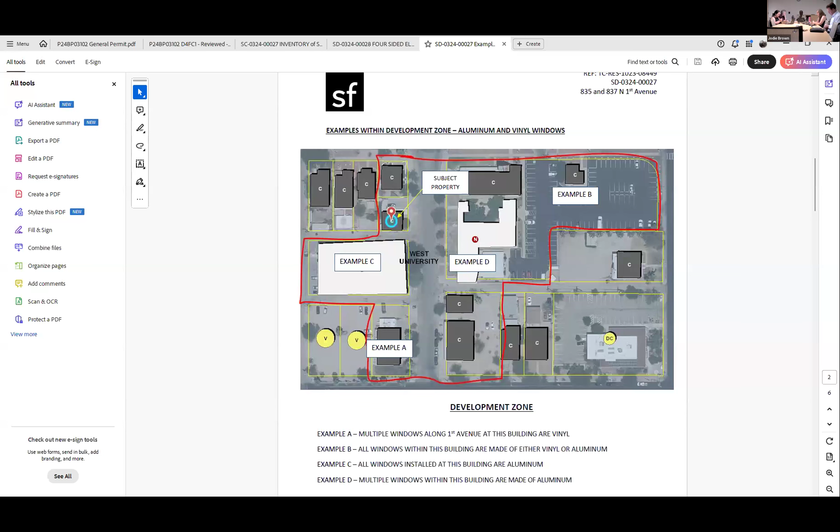Okay. So we'll start in regards to the property. This property was almost fully renovated other than the electrical work. All new vinyl windows were installed. The air conditioners on the north and east were installed, and the interior was renovated. There was a stop of construction required after code enforcement came by, and we created a submission of this property to match exactly what was actually being put into place.

So this is a shot of the subject property as it currently exists. You can see the large tree in the front and the replacement windows. The casement or the awning windows will occur on the north elevation. They do have to be excavated and widened and put in window wells to be able to make sure that we've got proper exit and egress out of the lower level.

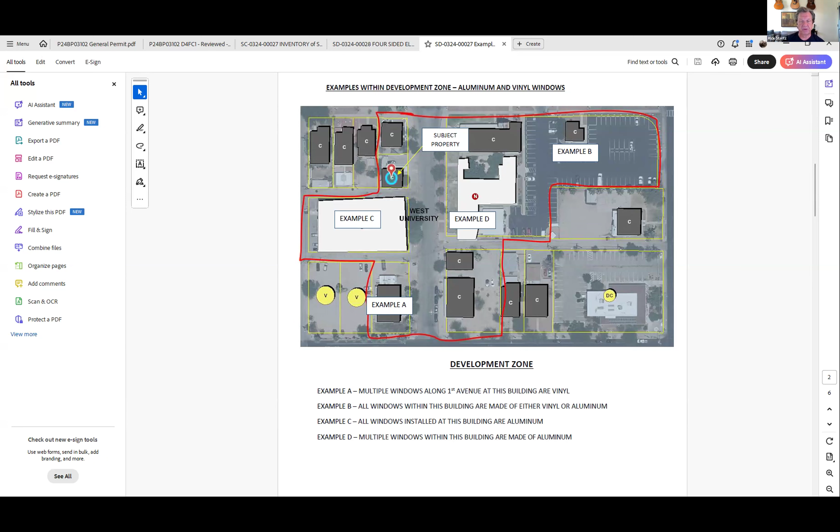And the owner's requested, although he will agree to mitigate if required, he wants to hear whether or not you would be comfortable with leaving the alley windows on this side and the bedroom windows on this side as vinyl, and replacing the east main window, which is the main facing window going into the house, with metal wood clad.

The examples are shown. This is on the fraternity house directly to the south of the property, showing vinyl windows. These were replacements and additions that have been put onto the property, obviously not part of the original structure. This is the building. This is the little island building if you go back to the development zone, this is building C right here, example B, which shows all of the windows on all 4 sides are aluminum or vinyl.

The 3-story apartment building, this is the alley that is directly to the south of the subject property. All of these windows are installed as aluminum. And the church building across the street and the administrative side of the building, those windows are aluminum as well. So that is the example of what the existing conditions are.

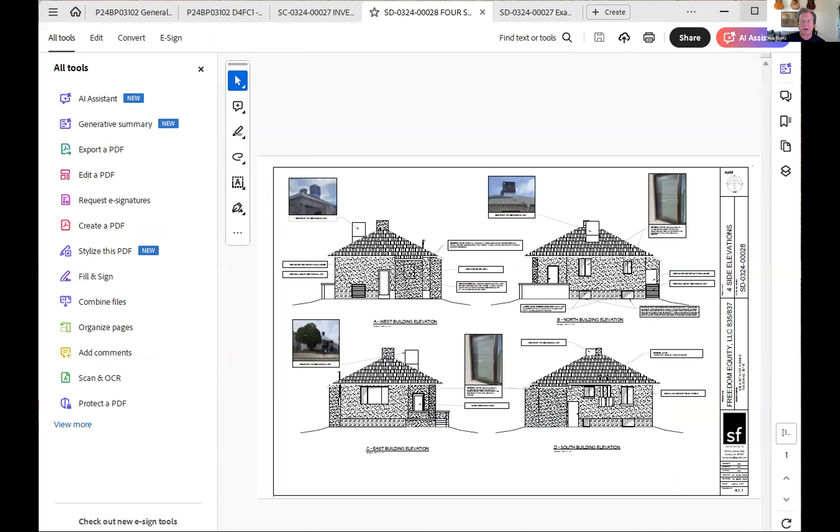The elevations of the property, this showing the west elevation. There is an air conditioner going here. This was recommended for approval by West University. This is the water heater enclosure recommended by West University to be painted to match the house. This is a pop-out addition that was put on subsequently by the previous owner, which included a window which is literally on the property line.

So we recognize that window needs to be closed, and that the west elevation and the south elevation of that pop-out, which is now covered in, I don't know, a combination of plywood and T111, needs to be unskinned and resurfaced, insulated, and properly stuccoed with a stucco material to not match the stucco style of the historic part of the building. Looking at the north elevation, these are the 2 awning style egress windows coming out of the basement or the first level.

And in regards to keeping the windows, he would like to be able to have these stay as in the north elevation and the south elevation. This faces the alley. This faces the parking lot to the north of the property. This is the primary elevation, which is the east, which faces First. And he'd be comfortable with replacing that metal or vinyl window with aluminum clad wood to match the profile of the historic window that was there prior to this renovation.

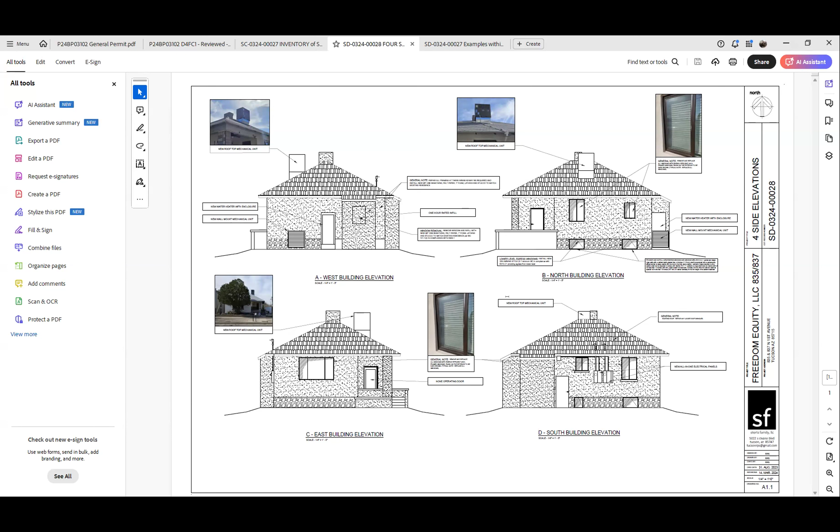Okay. Are we ready for Savannah's questions? Yeah, I mean, I guess it sounds like we're all on the same page that we can't approve it as presented. I guess I'm just curious about the next steps. I mean, we'll need to see revised elevations, and I don't think we've seen a site plan, right? We're talking about context of property line and things like that and additions. I think we'll need a plan. That's right.

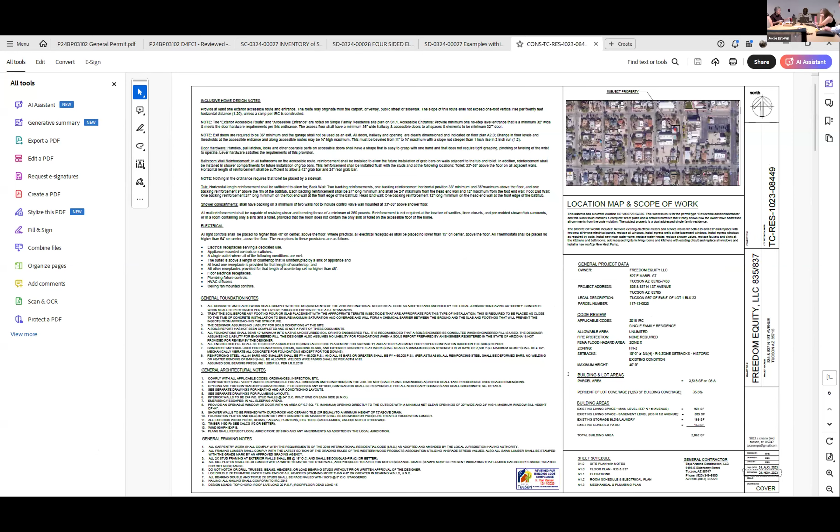So I thought of another question. Go ahead. So when we're looking at the 2022 picture, there's this ramp that was put in that's metal. That elevation now shows that there's stairs there. Were the stairs under the ramp or are you rebuilding the stairs? The stairs are concrete stairs and they were there. Okay.

I didn't see the plans before. Those weren't posted to us, were they? It's just the elevation plans. That's all. Sorry, I meant floor plans. We didn't get a site plan or floor plan. Okay, so we haven't seen this before. So can you explain the additions on here? You said one was near the property line. It is that little pop out right there.

Okay, going on the west side of the property, and this to the south side of the property. Okay, and those are proposed new additions? No, those have kind of been there for years. And what we're talking about doing is, because they're usable interior space, we want to take off the existing material, which is T111 and plywood and decaying material, and restructure as required, and then stucco that in a stucco finish that is complementary but dissimilar from the historic structure. Okay.

And that's as shown on the elevations you gave to us as a dissimilar stucco finish? Yes. But the elevations that we see still show sliders and stuff like that. It does, and in regards to an approval and a process, we'd be willing to stipulate that all the windows, and I just checked with the owner, he said that he would be willing to replace all of the windows, including the awning style windows, and to meet all of the requirements as outlined and approved by the West University neighborhood historic folks, which would mean to put in metal clad wood windows as a replacement as a stipulation to the submission,

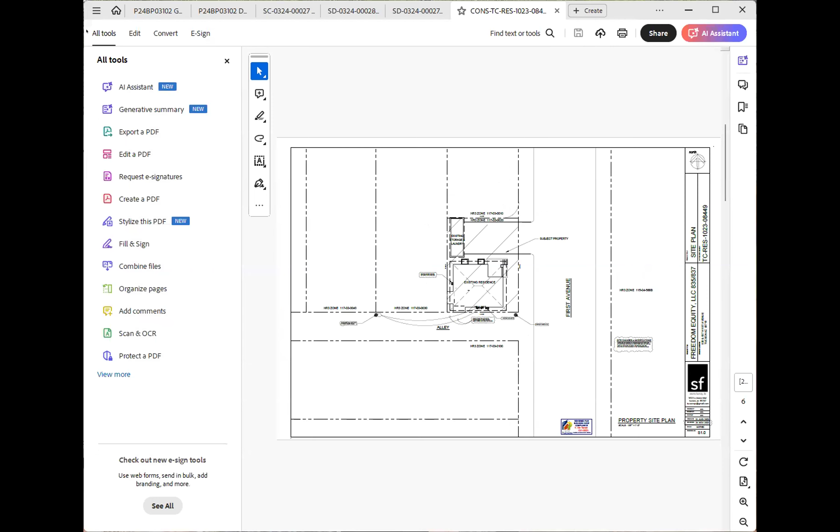So just so I'm clear, we're talking about the large window on the east elevation and whether the center window is operable or not. Right. Okay, I think it's operable, because why would you put a screen on it if it wasn't? Oh, well, there's that. Sorry. So I do have one question while you're forming this motion.

What are your thoughts on single hung versus double hung? I think single hung actually happens a fair amount, even though we call it double hung, because that's what we're used to speaking about. Yeah, I have a motion drafted where I'd call it single or double, so stylistically I don't care. Right, single will be much less bite out of his pocket than double.

Okay, so for Savannah, for the windows, we're thinking all windows should be wood or aluminum clad wood and shall match the original single or double hung configurations. And then do we want to add additional language for that front window? Maybe just that it's in the three-part to match original. And if all three should be operable, we should say that. That's fine with me. Okay. What else?

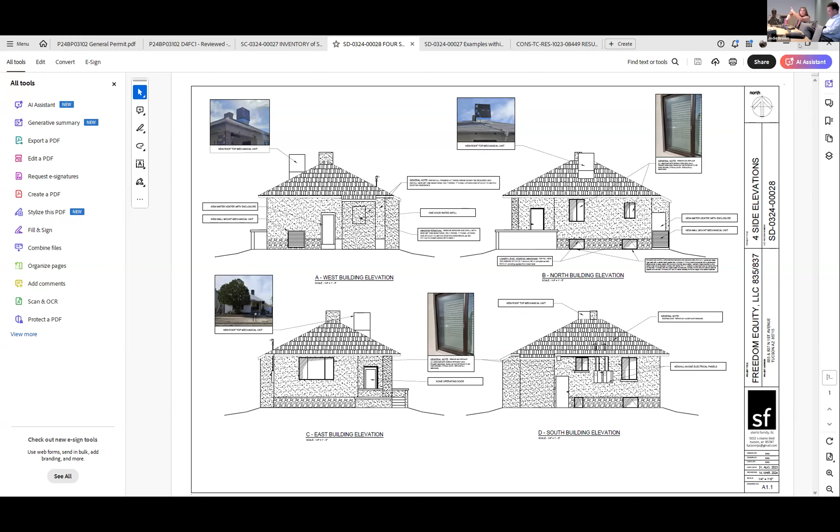The windows that we had, the vinyl windows, don't work, because that's no egress at all. But if you come out in your window well and your awning window is like this, the awning ends up blocking you from getting out of your window well. You guys understand what I'm saying, right?

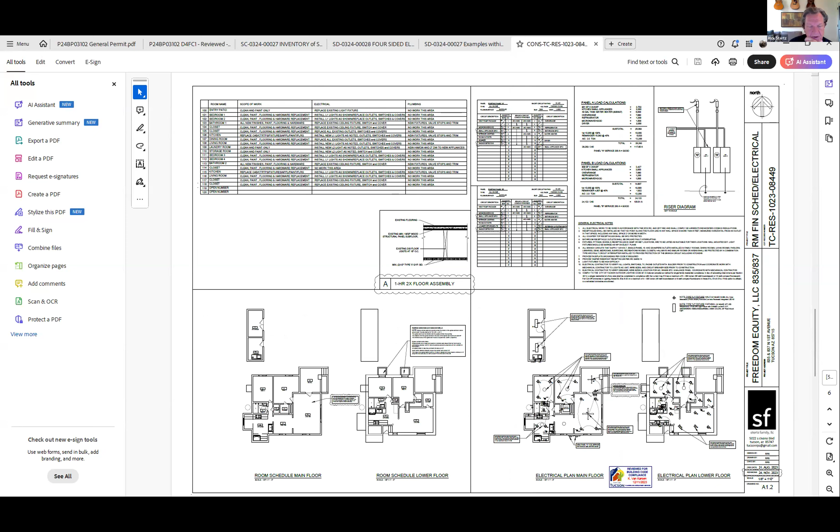A really big well. I do. I think there's a minimum clear height for lower level egress in the IRC as well, but that's not our purview. There is. We've dealt with this issue already, making sure that it met requirements.

Oh, sorry. And the window wells at these awning levels are wide enough and create enough width for the 5.7 minimum square feet of access. And the window wells are large corrugated dugouts, so to speak, to be able to access, and it works.

Okay, you just need those 180-degree hinges, so it can swing fully clear. Yes, we need 180-degree hinges, so it goes all the way up. They can't be the 135s, right? That would be a horrible way to die, that you couldn't get out because of the awning.

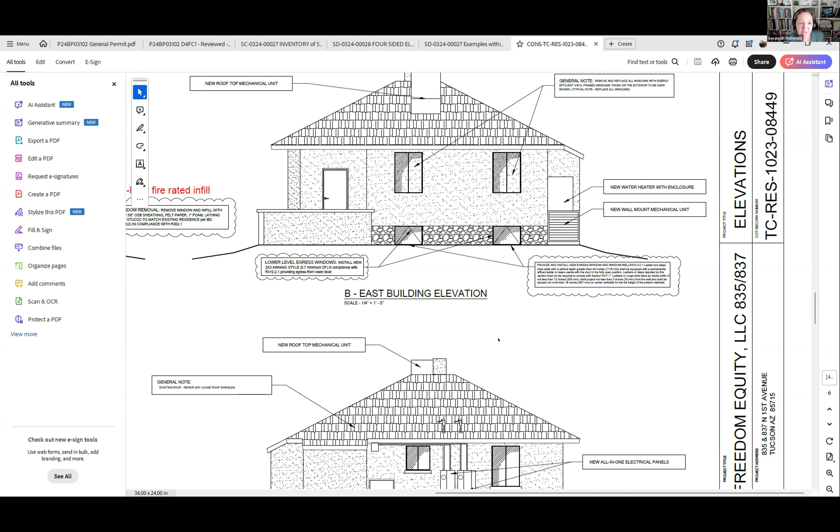Okay, where are we then? Are we still going through the West University recommendations, or are we beyond that now? I think Andrew is drafting a motion, which is excellent, but I just wanted to go back to what Jan stated. It's going to be a long motion full of lots of things, and where's the threshold of, like, just stuccoing where it's not stucco that they didn't plan on dealing with. It would be desirable to have something come in and say, here's the existing case, here's what we're proposing. And then it would be clear, we think you should also stucco here, even if you would rather not, so that we could have a meaningful application to review.

If we don't approve it, is there still a way to formally send our comments to him so that he can address everything? We could continue it; we either approve, deny, or continue. But what would be the point of continuing it? I think for them to really show what they are planning to do, because as we're discussing things, we're asking about things and Rick's saying, well, that wasn't part of the proposal, but we could. So then we have to figure out how much of it is beadboard, T111, blah, blah, blah, and try and cobble together a motion that covers everything. And it just feels like it's inadequate.

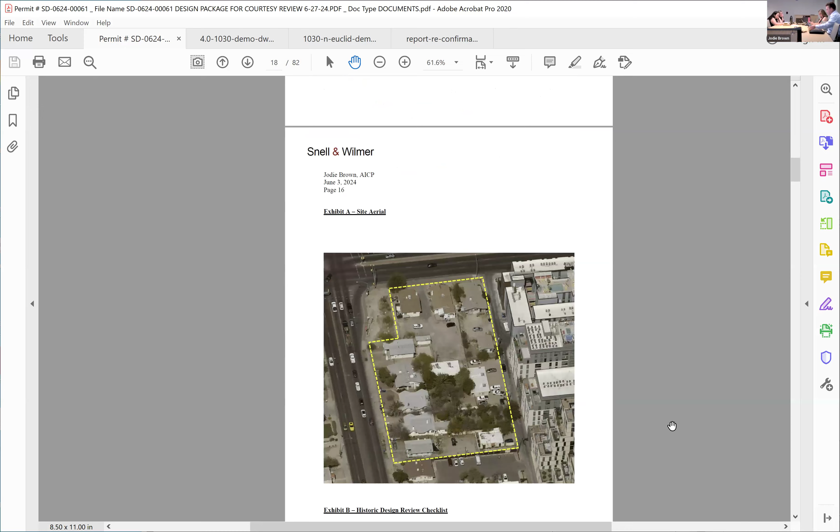And then there's a portion that also addresses the design guides for UOD, which is your guys' thing, but that is in there as well. So it's one collective document. Happy to go back to that with any specific questions. And then, once again, there's a lot of text here. That gets us into the site, and these were the checklists that we were utilizing for that framework. And then some of the surrounding context, which has been an interesting challenge for us, given

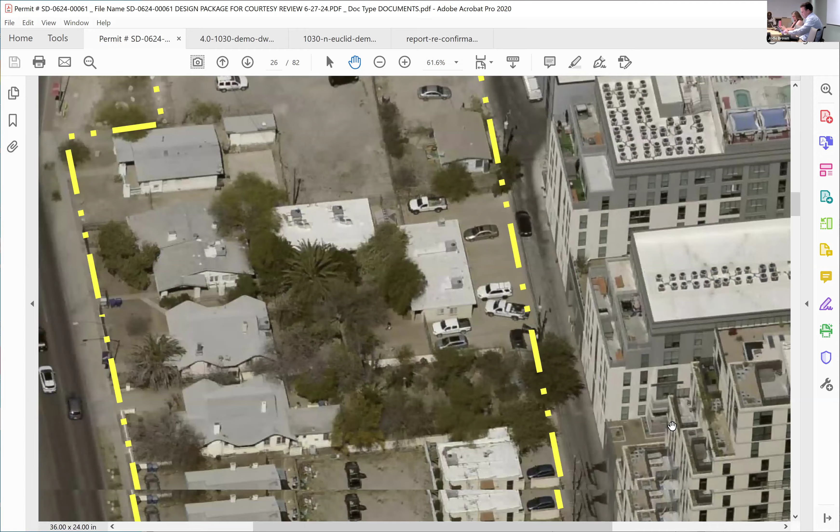trying to put something that meets overlay standards up against West University. So we're working on trying to find ways to balance details, and I'll show you a little bit of what the design team's done in that, and it's been contemplated as we go through. Again, we're all familiar with the sites. So I've got the technical drawings in here, and then I'll move into some renders, and then we can get back to these if there's any questions.

But basically, the building's laid out similar to what we did through the entitlement process. The two retained historic homes are living in this portion of the site here in the southwest quarter, fronting Euclid. A little hard to tell here, but I'll show you in the details a little further down. But the idea was to play off the frontage of those homes. So we have the townhouses.

The detailing on those are designed to be 2 stories. And so those elements there kind of play off of the 2 homes as far as that roof line element, as far as height goes. And then as far as setback and streetscape experience, try to retain something that plays off the porches on those homes.

And then you can see the rest of the building footprint here, so these are the townhome units here along Euclid, and then it steps back as it gets a little bit more of what we call a commercial feel as it goes around the corner. The Speedway is supposed to feel more commercial, so the character changes as you go around there.

And then we have the parking garage, which now actually goes a little bit below grade as well, so we were able to do a little bit more with the layout of the units as we got into the weeds. But again, this design gets you a total of 183 units, which is about 525 beds total, and represents 147 parking spaces. We also have our 30 workforce units as part of that total. Got all the data sheets, which are very exciting.

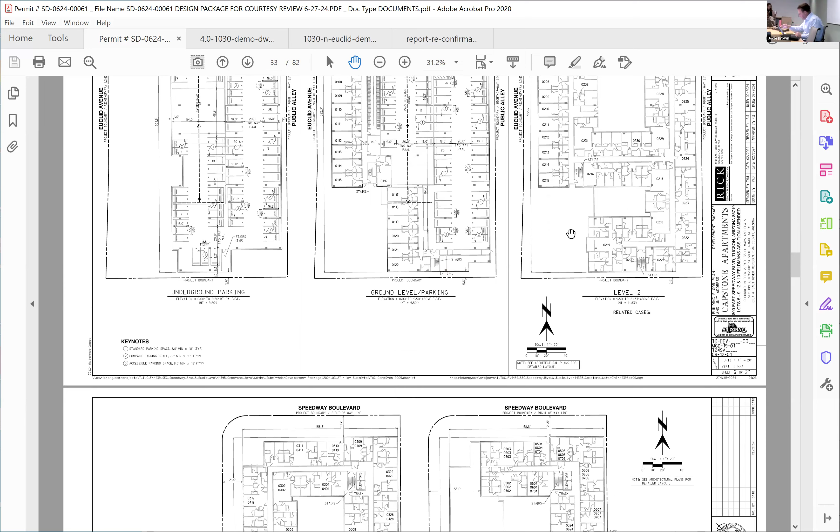When you get to the second floor, the building does pull back at that second floor level. It's a little hard to see in the renders, but picture a void in the building, which is designed to separate those two masses and create some visual interest in that area. As the building moves up to the fourth floor, you can see that's all void there. So that void is intended to open up behind the building.

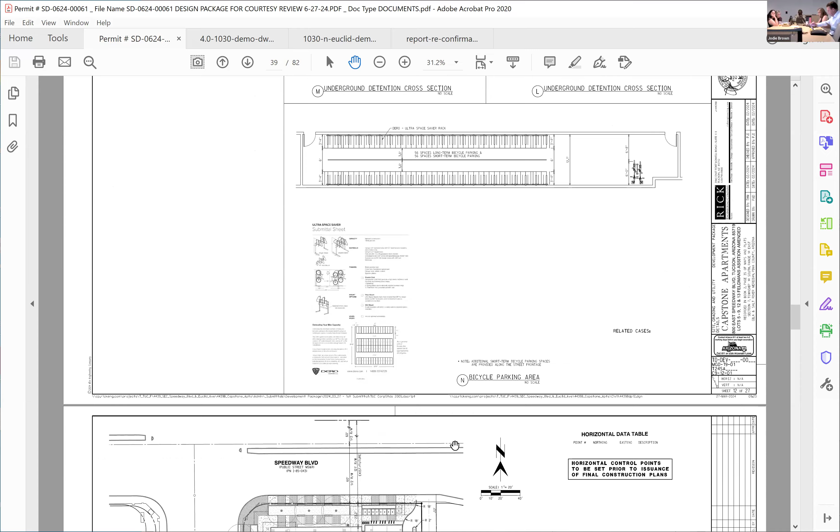So a little bit more detail on the streetscape plan. Again, these are all trees, tree grates, and planters. Let's see, details on parking. If you're interested in parking spaces, I love talking parking spaces. Underground detention, just for everybody's information, we have all underground detention. That was an issue during the entitlement process. So I think we'll manage a lot of our stormwater and are actually accommodating the alleyway as well, to improve some historic drainage challenges.

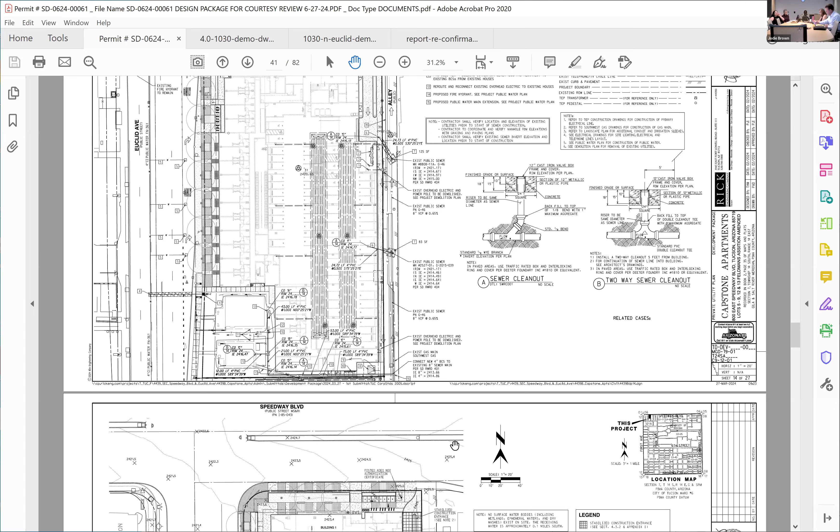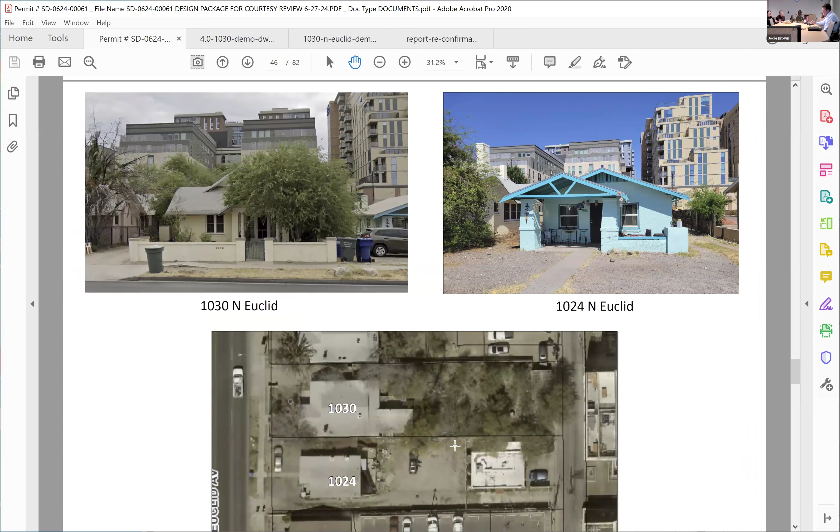And these are photos of the houses, which I think everybody recalls seeing. These are all the various houses out there, and these are our two retainers. So we got 1024 and 1030. And I believe 1030 is the twin to the next one up. So it's interesting moving one of the twins over, so we'll have two in the neighborhood. A bit of discussion about the color. We're not married to colors, so suggestions, happy to talk colors. And again, surrounding context, and got some notes here because we've been updating this as we go along.

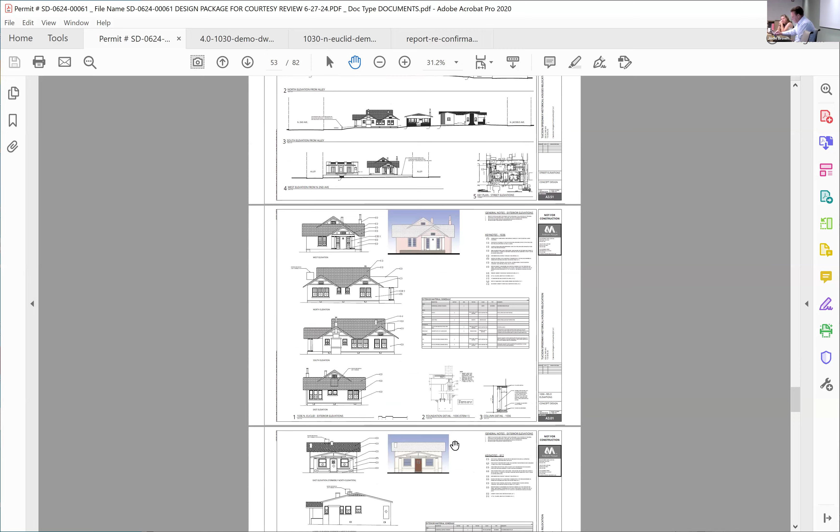But again, some of our challenges trying to pull some of these elements into a modern building is interesting. I think we've got a few different ideas. These are elevations of homes that are on the site currently, which is a checklist requirement, but they are, as you can tell, rapidly leaving the site.

And then we get to the fun stuff, where I've got kind of my flat elevations. Start with those guys. So this is our west elevation, looking from Euclid towards the east. And so the two historic retainer homes are here. I noticed in our render it's less blue, so I guess we're already playing with color. Good job, Jason. This is that void I was mentioning.

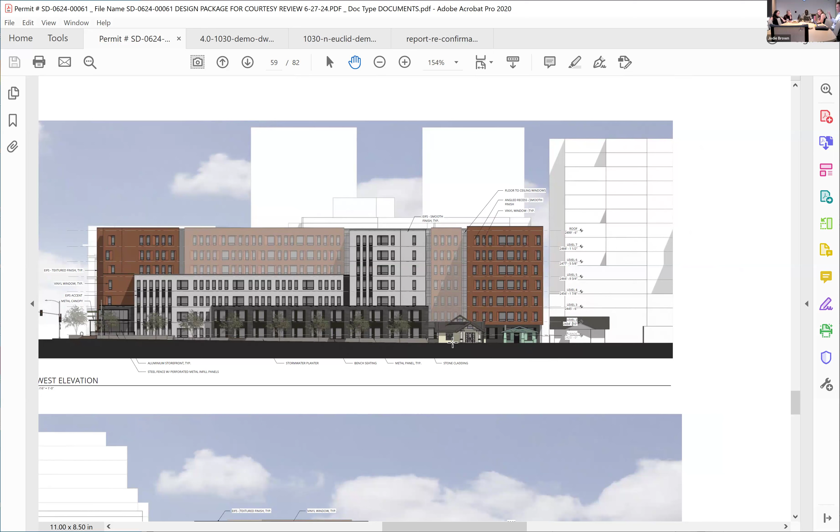So part of that, again, it's kind of hard to see in the renders, but there's a very purposeful void there in the building. And the idea is to kind of break that up, so that element's kind of supposed to read a little different than the rest of the building as the building steps back from Euclid. Those are the townhomes here.

And then you can see it gets a little bit more of a commercial kind of frontage, even though it's residential. The idea is to have that feel a little bit more like you're transitioning on the Speedway. So as you come down, heading to the south on Euclid, it feels a little commercial, gets a little modern townhousey, and then transitions into the historic structures, and then you can see the Udall Center south of us.

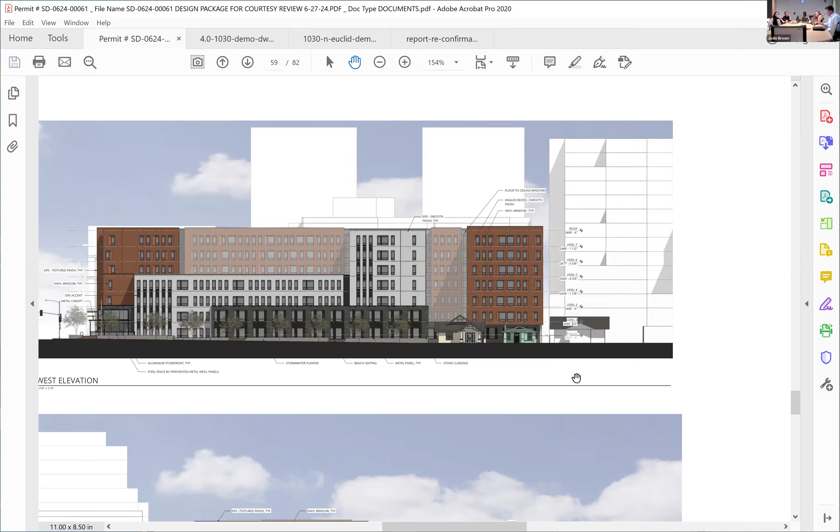This is looking from Speedway at the north elevation. Again, more of an urban appearance to tie into what's going on with the Hub to our east. And then that is the rear elevation. So if you're in the alley, always an exciting view, but again, four-sided architecture to bring it all the way around.

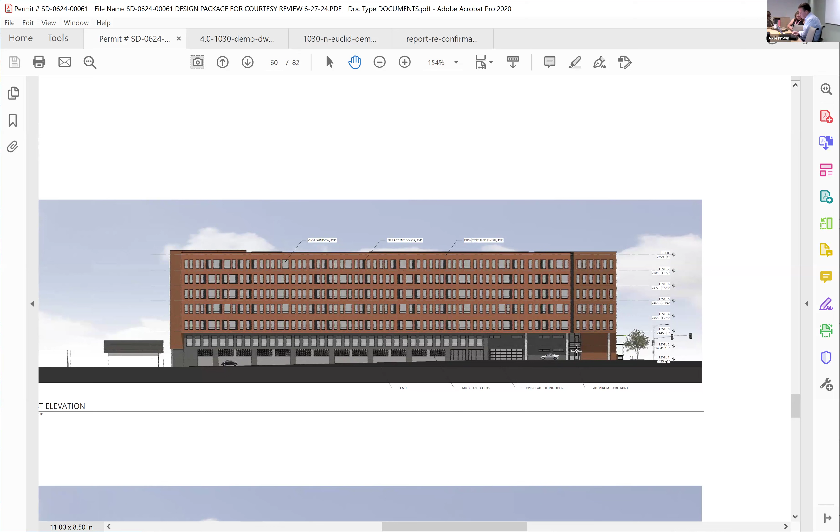What I like about this image is it shows you some of the slope challenges we're dealing with here. The site does have a bit of fall to it, which always makes things a little bit challenging. But here you can see a primary entrance, and we have a drop-off pickup zone up here that's on property to keep folks out of the alleyway. Again, the backside plays off what's going on to the east.

And then this would be the south view. So again, same kind of idea of something that ties into the modern buildings to the east and then transitioning as it heads to the west. And you can see here it illustrates some sections, but again, the idea of those houses was to mirror up with the townhouse. So that's the townhouse detail. These are porches there.

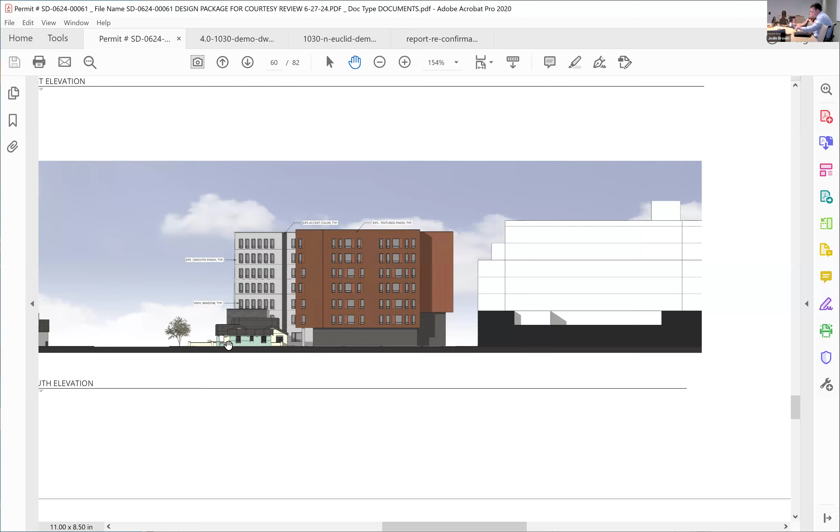So then we've got the development zone map, very exciting here. And then renderings. So all those flat elevations start turning into this, which gives you an idea of the corner of Speedway and Euclid. And again, part of the slope thing is you can see we're doing a finished floor, doing steps and figuring out the ADA access, all sorts of elements we had to address.

But you can see the raised planter treatment on the townhomes. And then as it turns the corner, again, this has sort of a commercial kind of feel to it, even though it's lobby amenity space, not true commercial. And then the building steps back from the corner, which was a design request of the neighborhood. And then again, trying to break those masses up with the use of colors and window fenestrations.

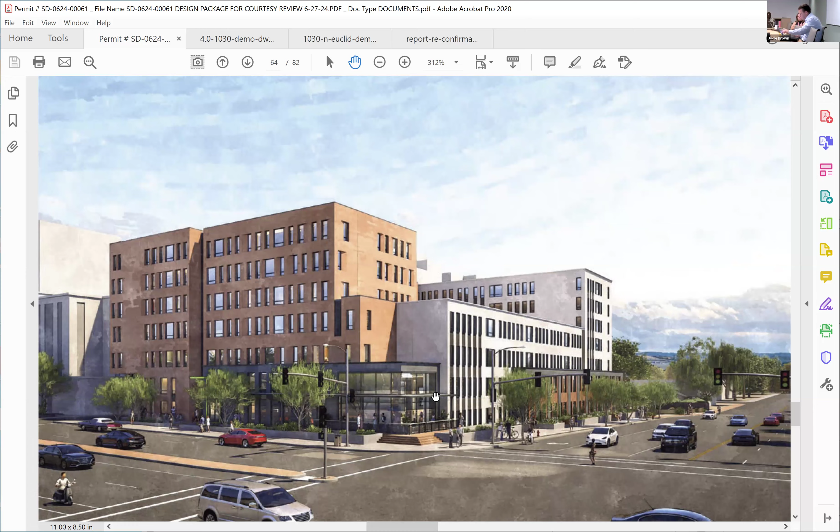And then we get into what those townhouses start to be. So they're again contemporary, but that second story height element plays off the height of the homes across the way. The nice thing about the grade is it gives us an opportunity to go public space with the sidewalk, semi-private space with a stoop step-up element where we can do some planters and privatize, and then up into the units themselves.

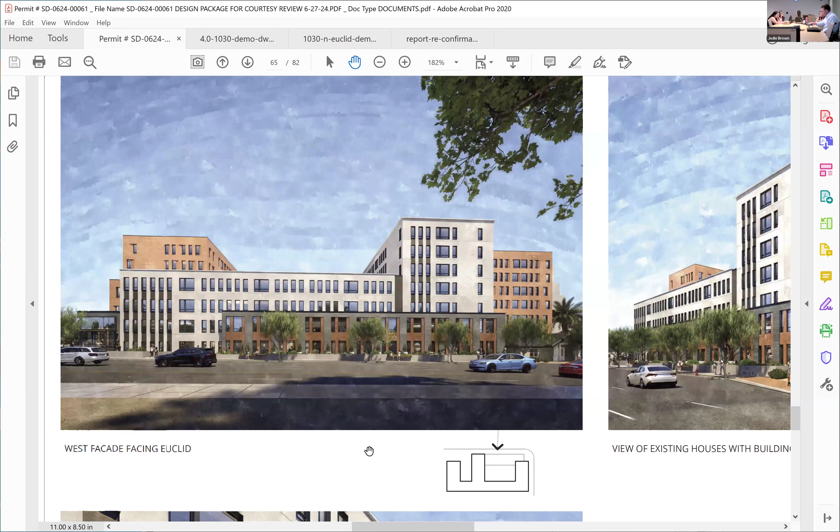And this is actually the main entry on the Speedway. I'm sorry, so this is the Euclid frontage again. There we go. So this is a little closer into what that townhouse elevation starts to do. Again, you can see the planters, and then our little house over there, and then the corner here. I think we were all kind of joking with West University, but our renderer got the scale wrong on the umbrellas, so try to ignore that.

But the idea was again to show the intent is to really hardscape and landscape around these structures in a way that makes them semi-porous and open gathering spaces that feel neighborhoodish.

And then again, transition to those townhomes. Some of the discussion we had and we're looking at is kind of the rear end of this building here, and this is where that step back is in the building. Again, it's kind of hard to see in the render because of the angle. But one of the comments related to is there something we can do with this portion of that structure to frame those a little differently. So Jason's looking at that, see if there's some options, or again open to suggestions. And then this gives you an idea of that as you go up towards those townhomes, planters and the transition space.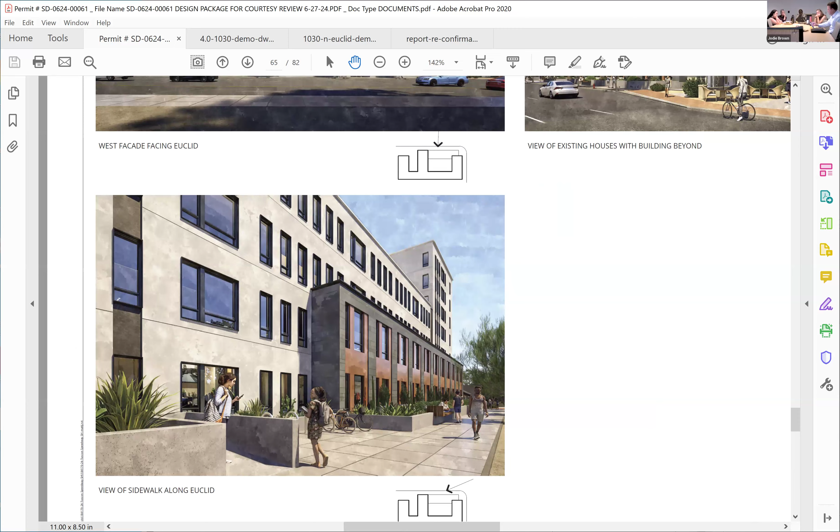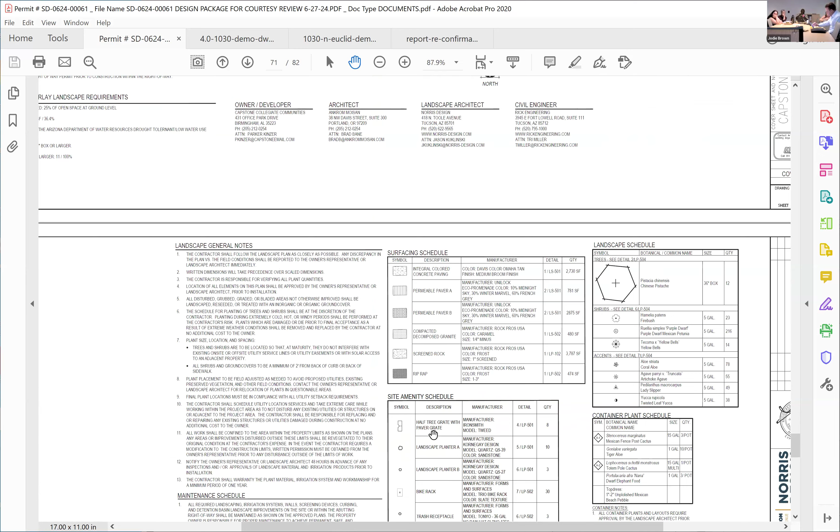So those are where the renders have gone. And then materiality, we're waiting on our materials board, but we can talk about that. Got a sheet study we're working on. And then I have the technical landscape plans if anybody wants me to speak to those a little bit. The version that we've got here doesn't have the final for the hardscape around the homes yet, but we're working on that. And that's pretty much it for now. So I'm gonna go back over to my monitors, and then I'll be happy to take any questions or suggestions, et cetera. Okay, who would like to start with some comments and questions?

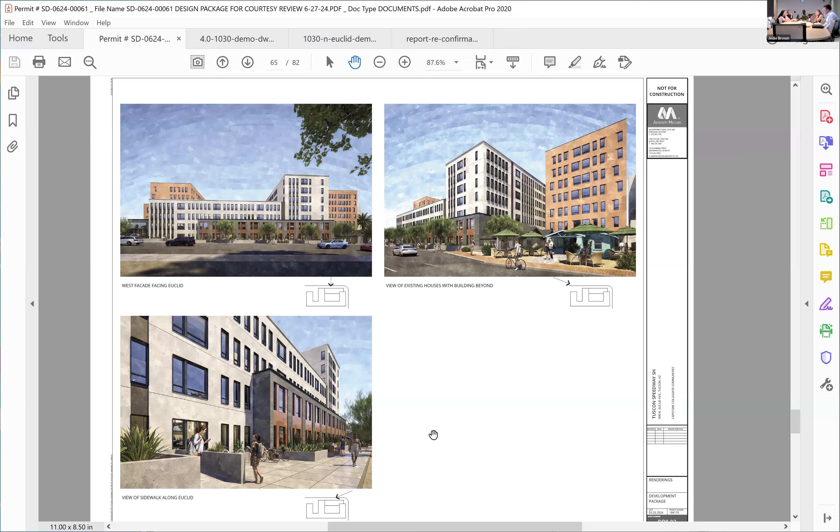Thank you for the presentation. I just have a few. I was trying to remember back when we first reviewed this. Seems like a very long time ago. I think was it last summer? I was trying to remember, there was a massing diagram. And is this a PAD? No, Stan, it's through the Main Gate overlay, so not a PAD. Main Gate, okay. Yeah, we amended the Main Gate, and the massing you see here reflects the massing diagrams that we had worked out with everybody as far as creating some transitional step backs to the structure.

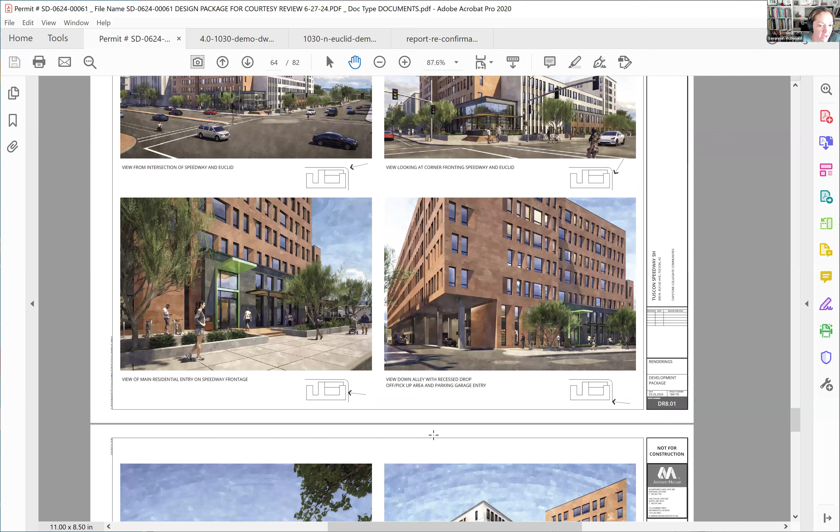Okay, I appreciate that, and I remember going through that process, but I didn't see that in this presentation. So just proving, yeah, we did this process, we followed it, and here is where we ended up. That's just what I was trying to confirm or look for. Oh, and then my other question is, of course, the one blank sheet you had was about material, and you're still thinking through all that. There was a rendering, not this sheet, but another one. It looked like the windows were like 4 to 6 inches back, maybe. It looks very masonry-like. Is that kind of the detailing intent? Even if it's not masonry, what are you guys thinking?

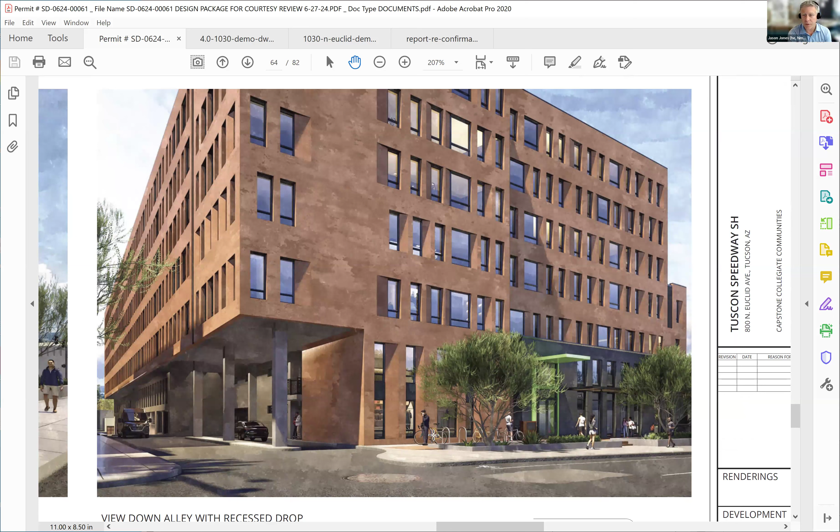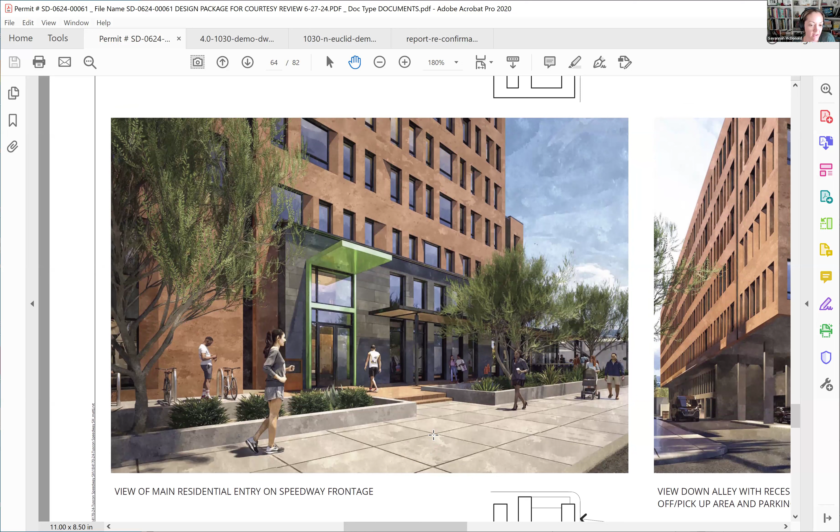Jason, do you mind walking everybody through what we're trying to accomplish here with, obviously not going full brick? Sure. Yeah, not a problem. Great questions. The renderings' intents are to be a little more illustrative as we work through the development of the materials. The large red area you see is stucco. It's an EIFS system. The gray is a cementitious panel and then we'll have some metal panel infills and stucco infills as well. Okay, and the windows? Aluminum? They are currently fiberglass in the estimate. Oh, okay. I'm just appreciating the deep reveal of the window. It has a very masonry kind of feel and look, which I think is kind of exciting architecturally. It seems in line with the other precedent set on Speedway. I definitely appreciate the corner approach too.

You said that was commercial or retail? It's supposed to read commercial. During the entitlement process, the consensus we heard from the community was they prefer it looks commercial, but actually is not commercial. So we do not have any tenants in there. It'll be some of the amenity elements. Like a leasing center? Leasing center, gym, could be study space, that co-office kind of space that students like to use. So programming is still in process, but it'll be active, but not like a Starbucks or anything like that. Oh, okay, and then those two levels on Speedway, that's just more of the same, residential units? Correct. Okay.

Yeah. Oh, okay. No, that was all. That's all I have at the moment. Thank you guys. Okay, thank you, Savannah. Who's next?

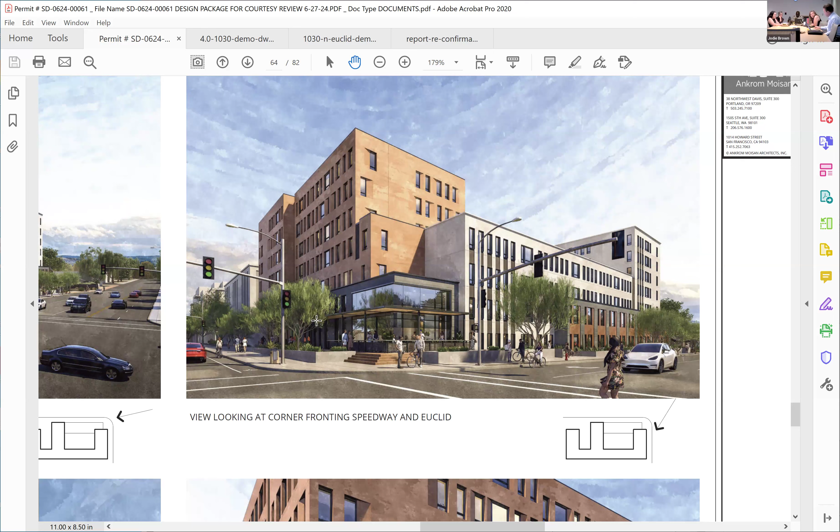I have a couple comments. I don't know if it's just the angle, because the angle we're looking at for the two remaining houses, it looks so tall behind them that it very much feels like the Up house, like it's surrounded. I do appreciate the lighter colors than what already exists in that area, because it looks very industrial with all of the hubs that are there. So I like this return to the more natural colors or the lighter grays rather than these really dark grays that are taking over that corner right now.

I think those are the main ones. I kind of like the funky home color. That's the color it is right now, that blue. That blue, yeah, for sure. I know that's technically not us, but I kind of like that it's that color. We were very open on the color, so yeah.

I have a question. When I look at the white portion of the buildings, your windows all seem to be quite uniform. When I look at your tan portion, it looks like the windows are recessed and there's one side that slopes down. Can you speak to why those are not uniform, why they have that zigzaggy look? I've just heard this from hearsay, because I wasn't here, but one of those other dorm buildings back there has windows that are offset. Apparently that's not how the design was originally conveyed, and when it was built, the community had a conniption. That's what I heard through the grapevine. So I'm just curious why these are all staggered like that.

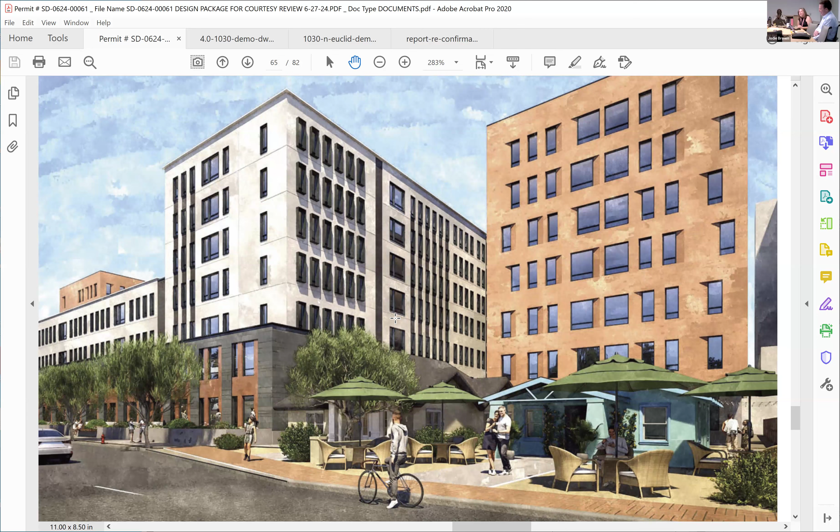Huh? I mean, no, really think about it, it's concrete on both sides. Hot. What the heck did you guys think I said? I said hot. We were all going different places, all right, wow, and you're in the same room with me too.

No, it just seems like, are you doing anything to cool that, or the area behind the houses? Cause it's just gonna be like a heat sink. Do those houses stay as residential? Currently they are, yes. They'll be residential or amenity, but currently they're being deemed as residential. They'll be part of this project. So we're working on the landscape plan that'll be in here.

How wide's that sidewalk area between? So Jason, what kind of width is that? Hold on. Let's get to the drawings. Currently, in the landscape plan, we do have an amenity area on the smaller house, the little blue house. There's a patio back there with cafe lights, so it'll be treated as an amenity. It's 7 feet from the property line. Let me get the right scale here.

Did you say the south one there is a cafe? No, cafe lights will be up above, so it's a place for people to hang out. Come on. You're hanging out outside my bedroom.

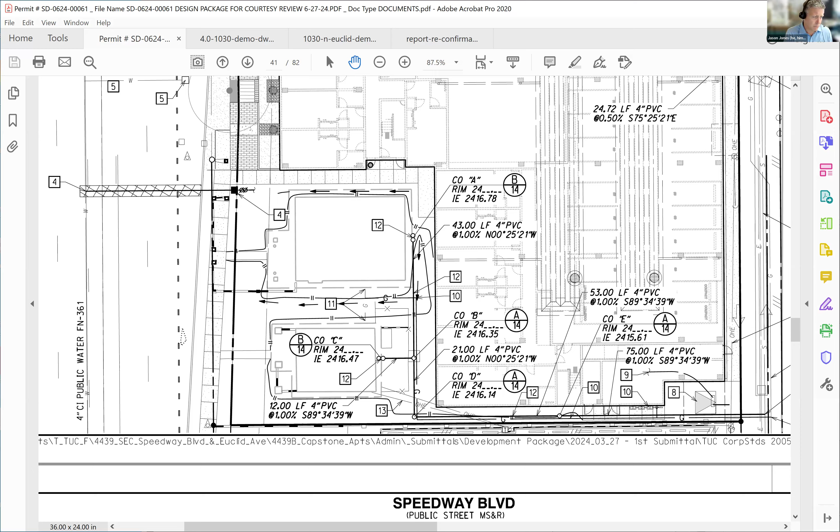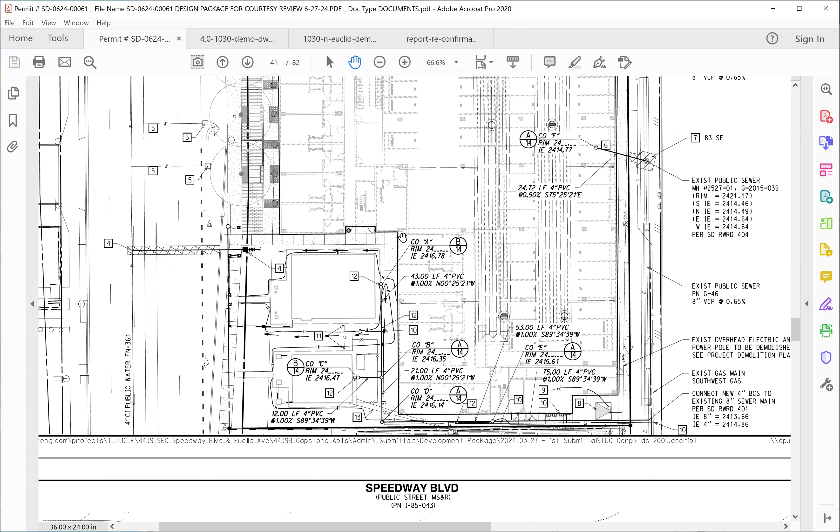While we're on this sheet, I had a question: is the underground parking, it looks like it's going under these two bungalows, is that correct? That is incorrect. Okay, didn't know. Yeah, the dark line that is kind of right by the 10 and 12, that's where the parking starts. Got you, okay, I think there was like a basement plan that it looked like it went under, but yeah, I misread. Gotcha.

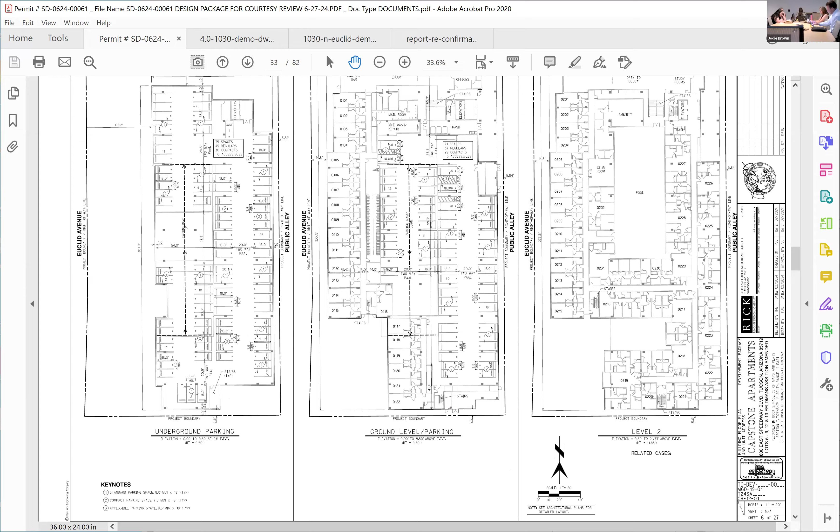Yeah, all these. Oh, I see, yeah, right there. That little notch has been removed to stack all the way up due to the same reason you're probably bringing it up. Okay, all right. We're done moving houses. Excuse me, thank you.

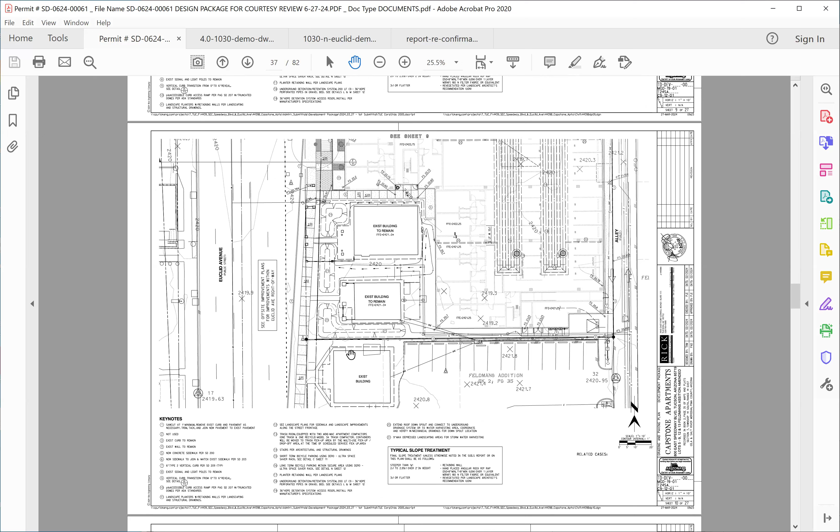I do have some architectural or landscape comments unless anyone else had anything. Go ahead. So in general, I like it. I think the architecture is pretty solid. I like the windows that Savannah mentioned too, the kind of faceted, recessed windows. I can see they do kind of read like canyon-like or like rock sculptural, so I see your inspiration there, for sure.

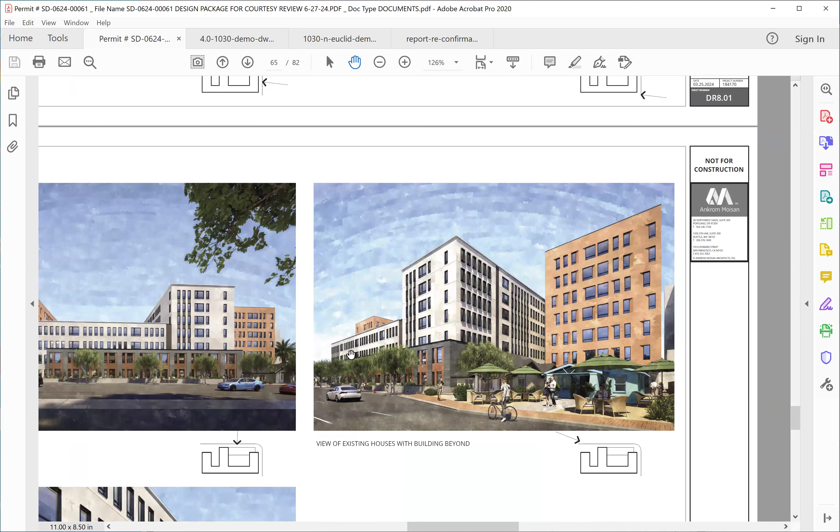I think the scale is, you know, it is what it is, but that rendering that shows the bungalows and then the big towering building behind it, it does feel like you're kind of in a canyon or something there. But I think there's not much we can do in terms of scale.

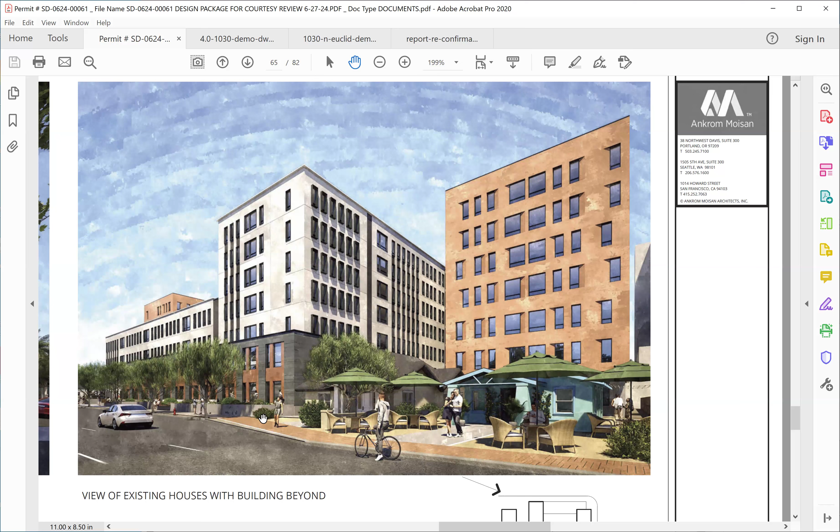One thing I did notice on this elevation, all along Euclid, I think you guys have a really nice landscape buffer and transition setup, and then that kind of goes away here. I'm wondering if maybe you would explore some sort of buffer there so that it doesn't feel like the front yard of these homes just steps out into traffic, and maybe create a little more hospitable place where you might actually put seating and chairs. But that was my immediate reaction. It feels like it just kind of spills right out into the street.

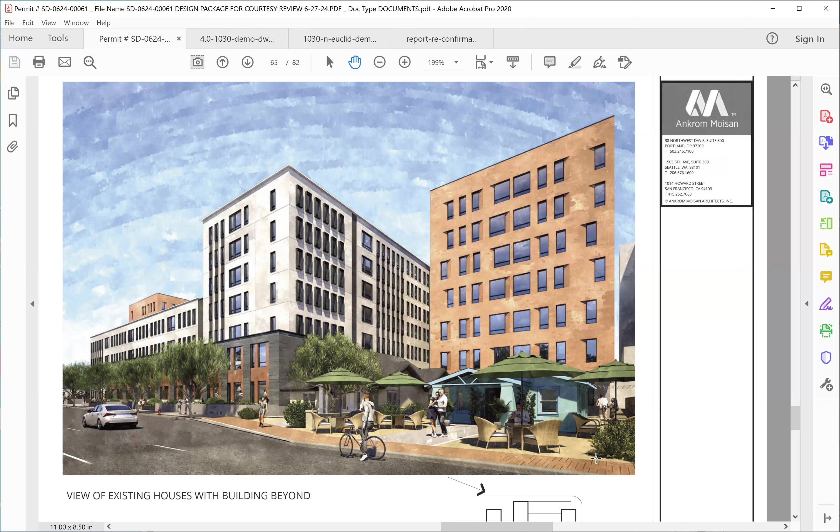The other comment I had, we talked about masonry, but right now you guys are just proposing EIFS and then the cement cladding. There may be an opportunity to introduce some masonry, maybe low, not like a traditional wainscot, but something that would help break that massing down just a little bit at the ground level, like the bungalows and how they're built up on these masonry stem walls.

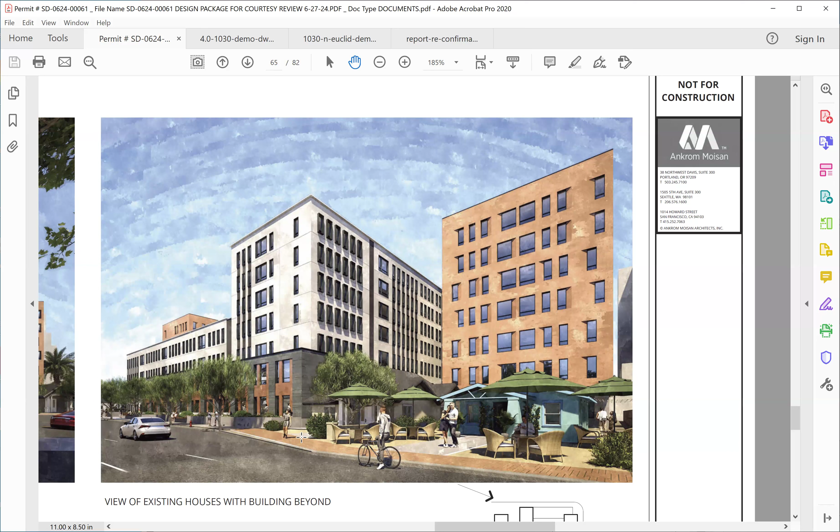Yeah. Our intent was to have the planters that you see right there. Those are masonry. That's a nod to the masonry treatments that we see in the neighborhood on the base. Yeah, I like that. I think if you could continue some form of that treatment in front of the bungalows, that would help a lot. Okay. But other than that, I really like it. I think it's a nice looking building, certainly a lot more intentional than many of its neighbors. So nice job. Great. Thank you.

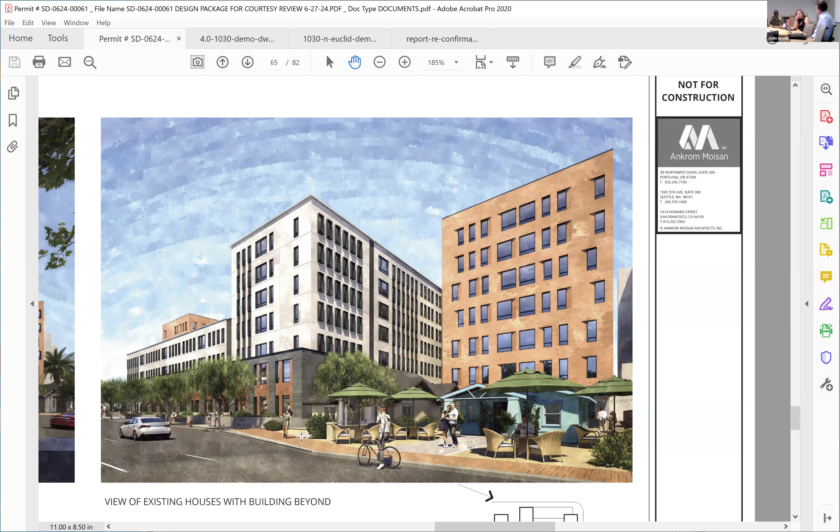No, you didn't see it when it first came through. It did look like its neighbors, so I appreciate getting to see it like this now. Noel, speaking about the landscaping in the front, I seem to recall that you had to actually increase the size of the turn lane there, right? So you lost some land, right?

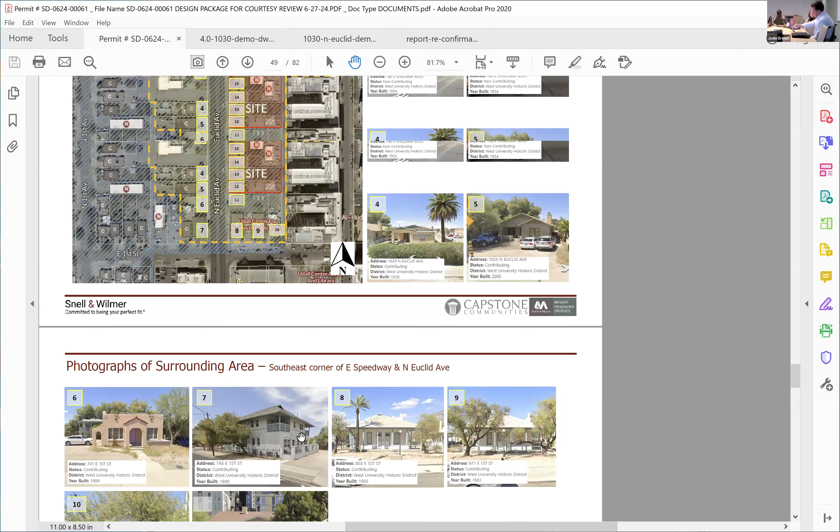Yeah, that's a good point, Jodie. So we actually have, actually I think it's just the same. Which, as a driver on Euclid, I appreciate that you have to increase the turn lane, but yeah, so you do lose some land. Yeah, so part of the challenge with this site was everyone knows the current, if I can see right there, the stubby version of a turn lane, which meets absolutely no modern code.

That gets fixed by this project, and what you end up with is a taper. This is kind of where it is today, and then this taper. So to bring this taper down, the taper has to offset to narrow down, because once you hit the Udall property, we need to bring it back in at that point. So this area here, this curb line work all gets done.

And to the comment, I think a way to help with the front of these a bit would be looking at detaching that sidewalk and maybe formalizing a little bit more with the new building. I think the intent was how much of this can we leave as is. But after looking at that, I do understand that comment. So as we get into the landscape hardscape plan in front of those houses, a detached condition I think would be consistent with what we see in the neighborhood. So it wouldn't be a massive shift.

There is also a historic light pole that they will be reinstalling, even though it doesn't show up on their renderings, it's there. It does exist. It's just being moved. Yeah, we'll move it in. And Chuck and Tree at Rick Engineering have that on their list, very specific items on the civil plan. We'll make sure that's accommodated.

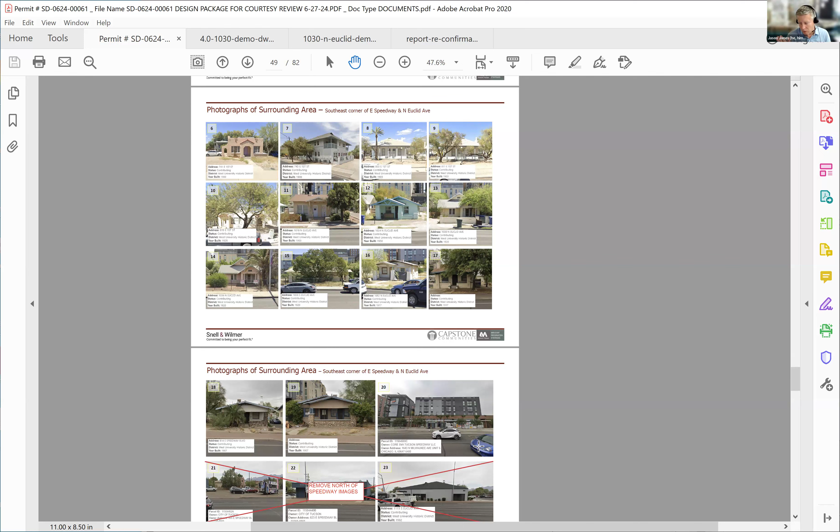Obviously we have a smooth trowel EIFS system considered on it right now, but actually on the interior facets that everybody's been looking at, we're changing the stucco appearance. So we're really trying to play on the different types of stucco in one field plane, but relating back to the smooth trowel stucco throughout the neighborhood. That's kind of our approach to this, not to be too different.

When you were talking about the masonry work for the planters, in here they're smooth. Are you going to have some sort of design? I'm thinking of the chimney that got removed on the house that got moved to Joel's property. And also there's a lot of those walls that exist on campus that look like they have the lava rock from the mines. Yeah, we can definitely take that into consideration.

Actually, Jason, I'll send you an image of the one where the streetcar goes down the same street as Second, and it's got that low wall. And I think scale-wise, I'd love to look at the number on it, maybe in the ballpark there. Maybe there's a way to just play off those a little bit. Maybe just introduce that for the townhomes, and then that could be a transitional material.

On the white portion of the building, it looks like that parapet cap is proud of the building quite a bit. And I do like the shadow line that casts. Is that intentional, or is that an artifact of the rendering? No, it's intentional in this rendering. Okay. I do like that, and I think very abstractly that relates a bit to the deep overhangs of a lot of the craftsman style homes. I hope that's not a value engineering target at some point, but I like the shadow that it creates, and I think it helps with the scale. It caps that building nicely.

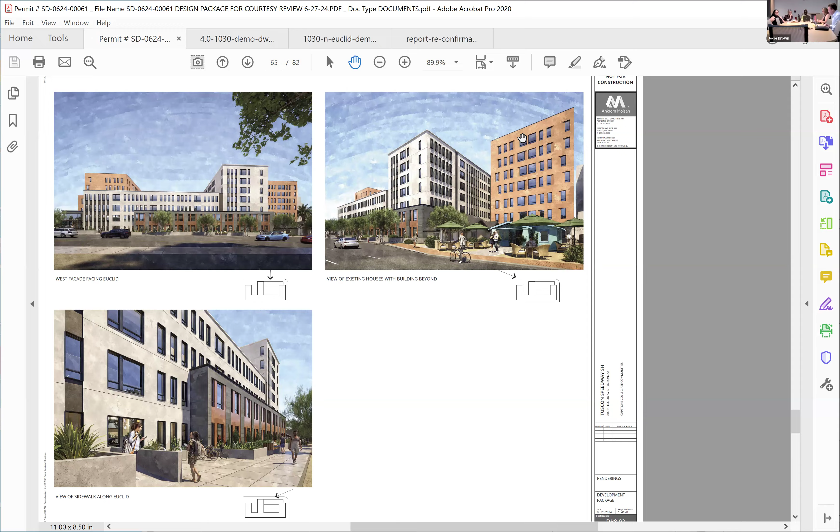It's in our name. Okay. Anything else from any of the group? Thanks very much. Well, appreciate everybody's comments. It was very, very helpful. Been taking diligent notes. Frankly, that's why Sarah's on. So Sarah, you got everything, I hope, because Jason's got a little bit of work to do. Hey, yeah, I got everything. Excellent.

Now, what are your next steps? Are you going to continue to develop this and come back for another courtesy, or will the next step be your formal submittal? Yeah, we'd like to actually go ahead and move right into our formal submittal. I think we got clear direction from West University and y'all today that we can bring back something we can work with. Hopefully get that support recommendation.

And then are you scheduled to do also a courtesy review with one of the Ds? DRB, DRC? You know, that's a good question. I've gotten two different discussions on it, so I think we need to have the sidebar. Okay. So ideally, not to tell you enough to do, but hopefully be back here next month or the month after, depending on how fast my team can draw. So we'd like to be back quickly.

Well, one drawback to student housing projects, you definitely have a hard opening day. You miss August, it's another year. So unlike a normal apartment where if you're a month off, you're a month off, students for some reason all rent in August. I don't know why.

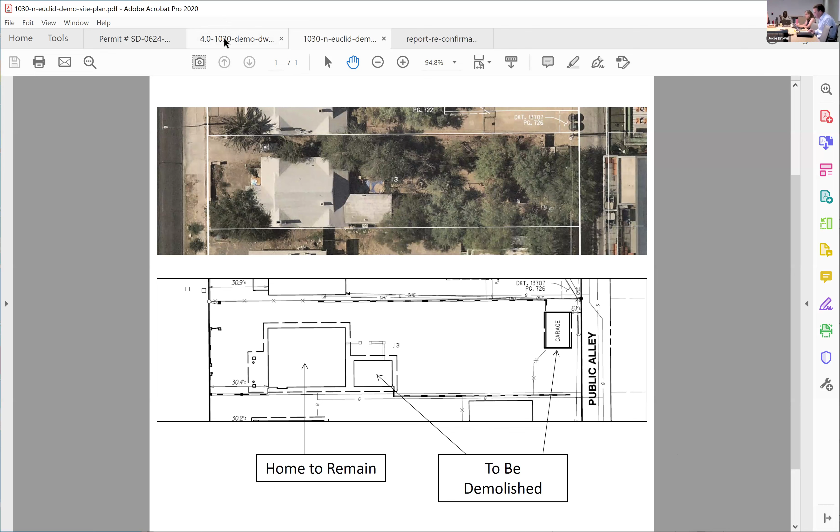Great. Yeah, this would be a very similar slide to a conversation a few minutes ago. And this is the 1030 house. So that rear portion is a detached outbuilding. It's integrated into the roof, but it's actually a freestanding little structure. I'll get to the fun stuff. So we had Roger, who's on with us, do his report, which you should have. I won't bore everybody with it. The conclusion was it's not contributing. Although it's a well-written report, Roger, so not to skip over it, if there's any questions, I'm happy to revisit it. But basically, it's 262 square feet in the back. It's detached off the back, and we'll show the photos here.

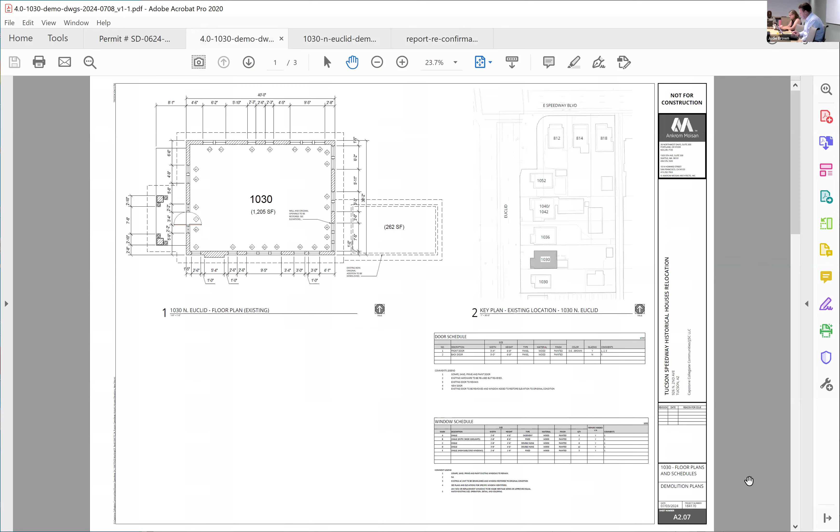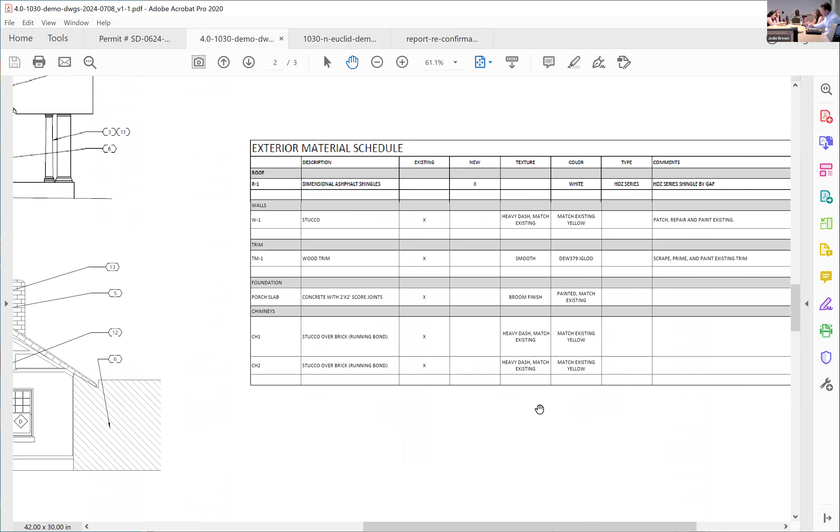So what we would like to do is remove that since it's in the way of some other stuff we're doing. And we have a rehabilitation plan, which on this one is actually fairly simple because they didn't connect it to the house. I don't have to worry about the back. So really the issue was just dealing with the detail in here. We obviously had the design team come up with some instructions to the contractor, but essentially we're going to take the thing off and then repair any damage there is to that existing roof line.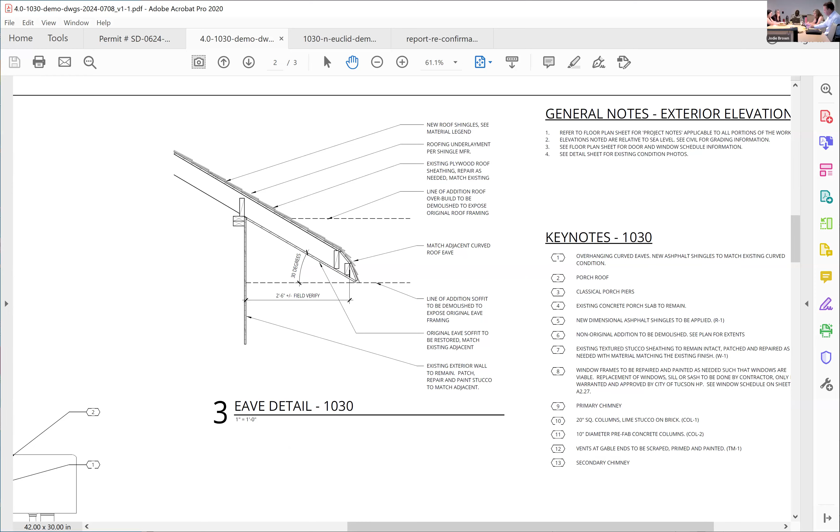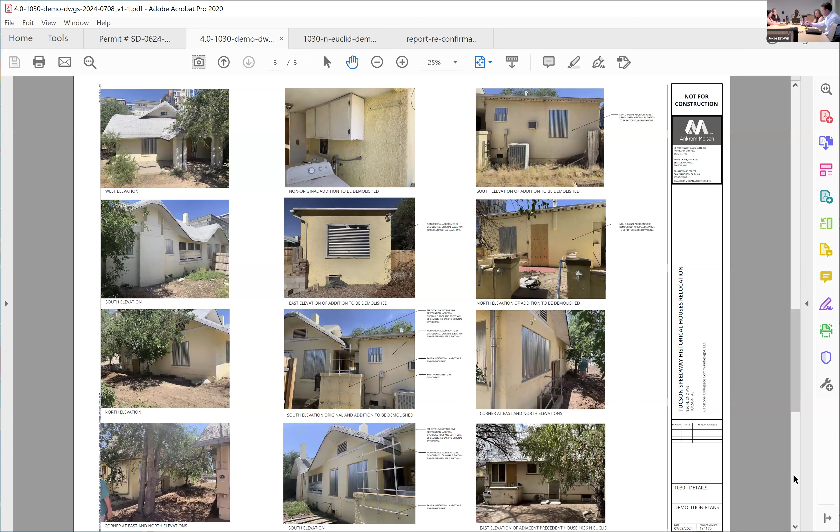With both of the homes, this one and 1024, we'll be coming back with our rehab plans. This is also starting to address that as far as window schedules, etc., and obviously color. So all the roofs generally on these will be redone. As part of that, we'll cure any of the damage that's there from that little addition they did. And I've got, if you're interested, photographs of it. You can clearly see the quality of the construction. Very obviously not from that era. And then the detached nature of it, you can see clearly here how the two interplayed.

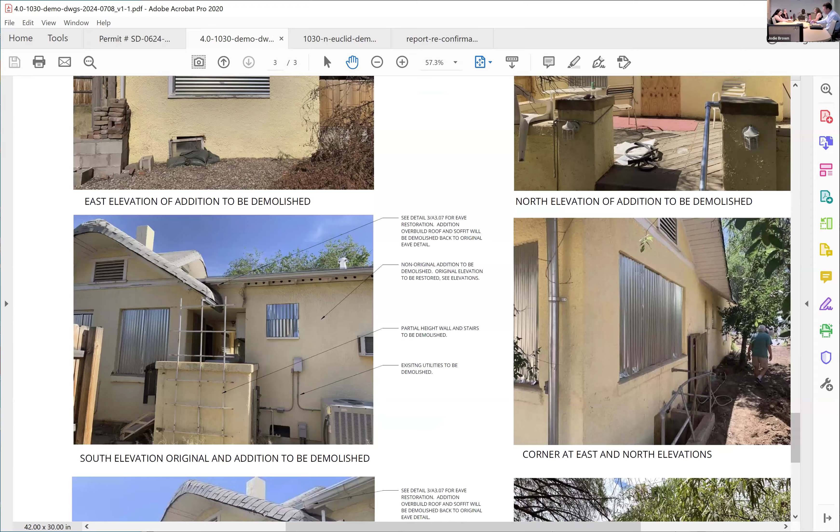And what they did is they kind of put a little soffit in here to kind of keep the birds out. But you'll notice that the roof vents stop. So most likely when we open this up, they're probably all there. They just most likely connected to it. So hopefully it'll be a fairly easy cleanup, but if not, it's not real hard to replicate because it's just roof decking and shingles. So that would be our rehab plan. With that, I'd be happy to take any questions.

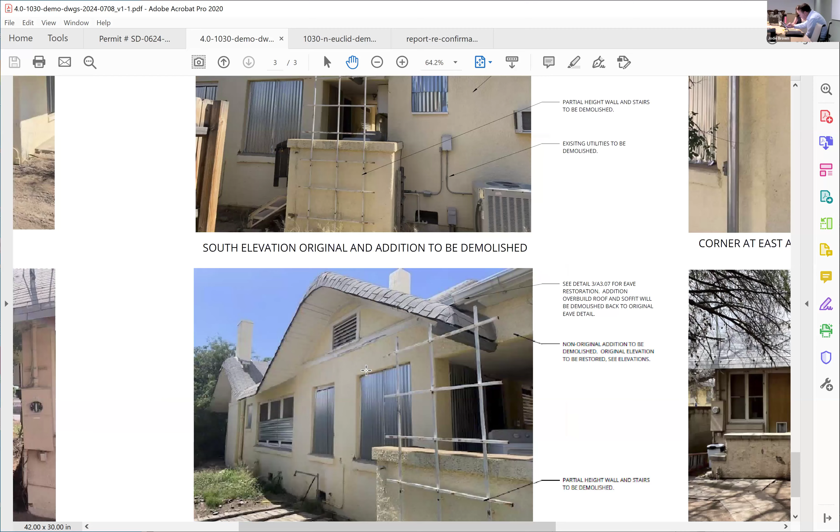Okay, who'd like to begin? I just have one quick question looking at it now, and that's whether that wall that's right there enclosing the gas area, is that coming out? That'd be removed as well, yeah. Is that touching the house? I think it's attached. Is it attached? Oh, it's attached. Yeah, it looks attached there. Yeah, it looks like it's a little U-shaped sort of pony wall. So they were using it to kind of enclose that space off.

To keep other people using their washing machine. Well, you know, you can understand we've had a little bit of a trespassing problem as these have sat vacant, so. Yeah. But yeah, it looks like where it connects, it's just a little bit of stuff.

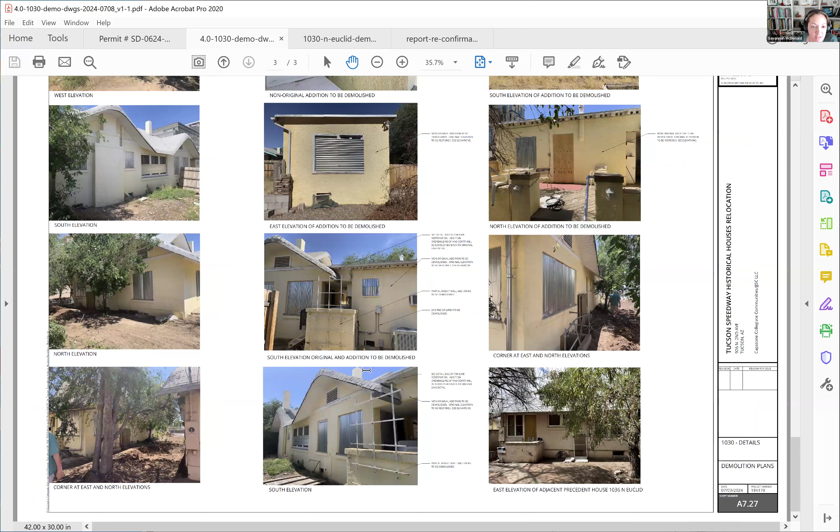Okay, other questions? Go ahead. I have a question. It looks like a masonry site wall, that all stays, right? Or no? Right, like you can see it on the right middle image. There's some piers, like maybe that was the entry. Is that here? Yeah, right there. That is off the south end. Well, yeah, sorry, I was asking about this one, but I guess east. Is it on the north and the south? Yeah, that's north.

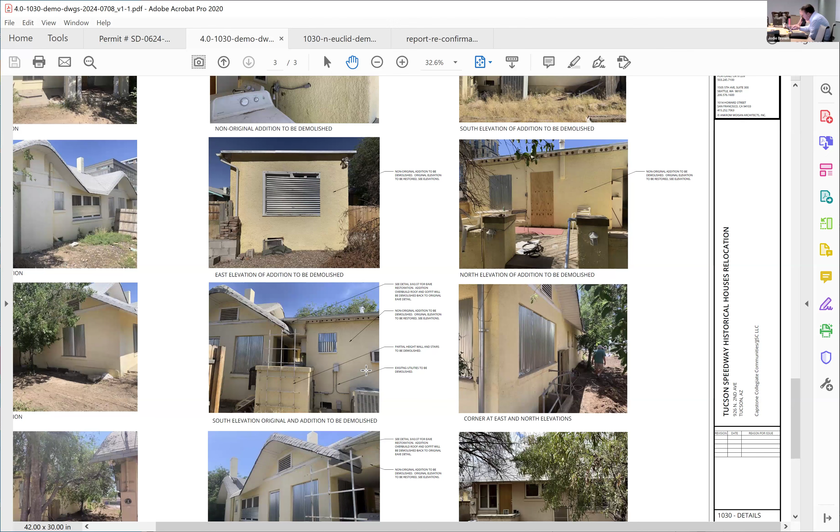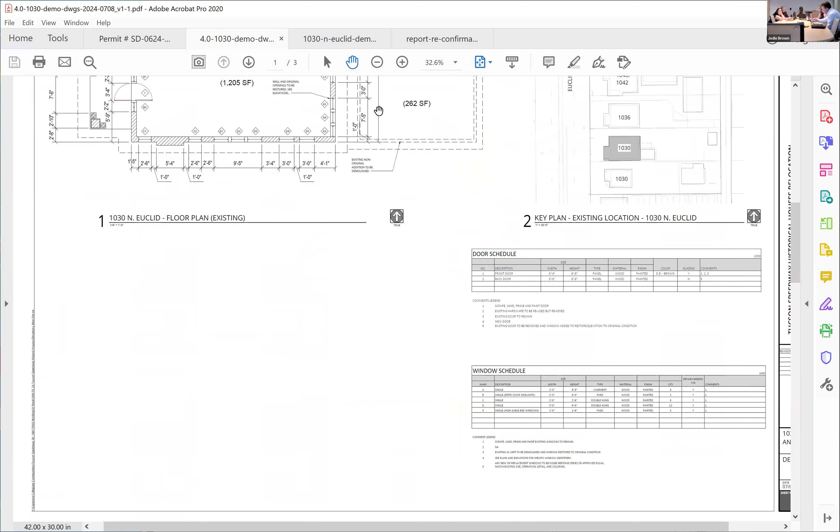So that looks like that's off the north elevation, because you've got the building behind. So that'd be the north elevation. Oh, I see. Yeah, I was looking at the plan, it shows that. Let me show us. Let's see, so that would probably be, oh, I see. It's on this one. Yeah, you can see it looks like they made a little yard kind of enclosure here. So that would be rethought as we did the hardscape plan for the new buildings, and I suspect it was probably done when they closed that area.

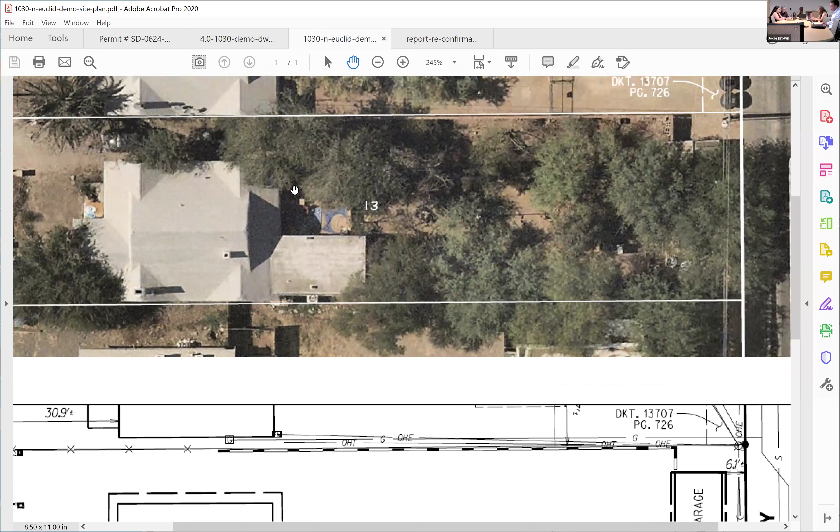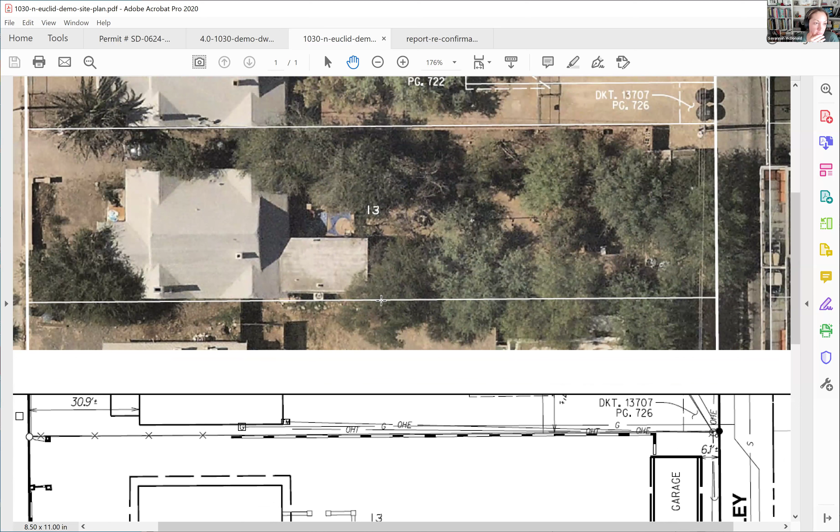I couldn't understand here. Is that? Oh, sorry, that wall is a little hidden by the tree here, but if you can see my mouse there, it's like a little pony wall that kind of enclosed a little space around here. So that would come down as part of the rethinking of the hardscape and lawn yards area for this building when the new build comes up. And that was built when the addition went on? I would suspect so, given the angles of it. So it's connected to the addition. Okay. And the garage? The garage is a non-contributing element.

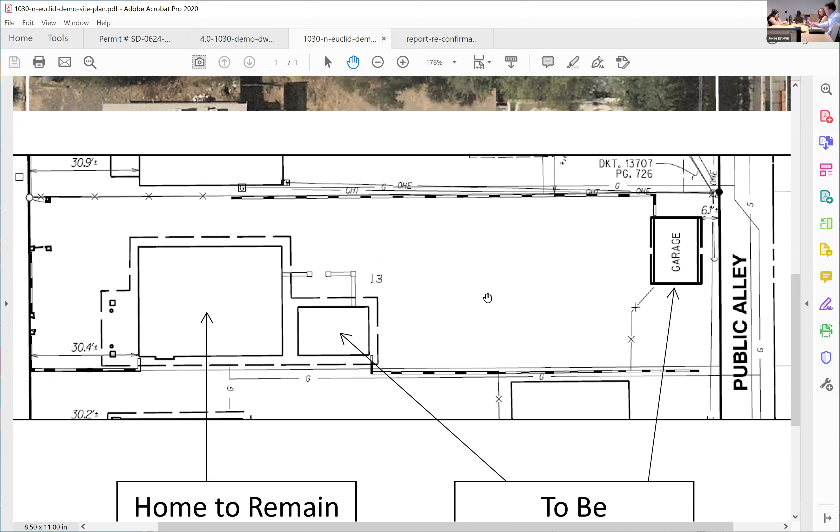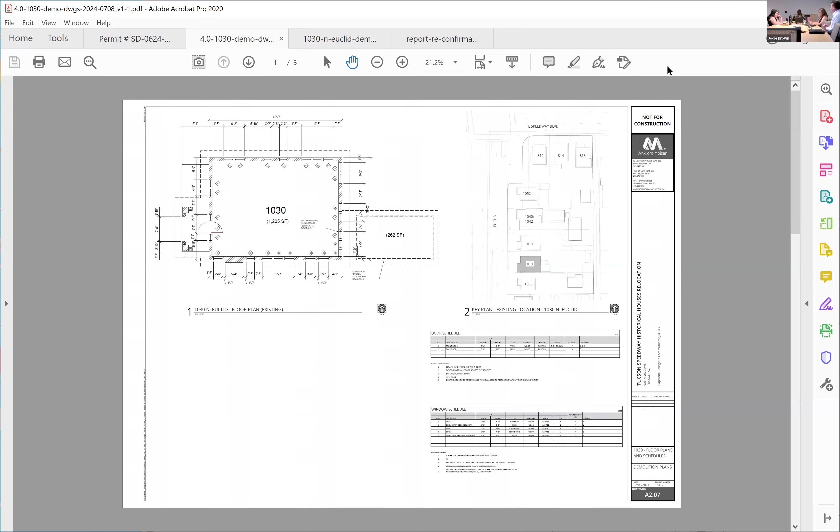Okay, other questions? Jan, did you have anything? No, I think I already did. Oh, okay, everyone weighed in. Are we ready for a motion? It's just to approve, right? Yeah. We'll fix the roof to plan. Right. I can make that motion. Go ahead. On the matter of SD-0624-00121, 1030 North Euclid Avenue, move to approve demo as presented. I'll second.

Okay, is there further discussion? Okay, if not, I will call roll. Terry votes aye. Ricky, aye. Jan, aye. Savannah, aye. Andrew. Okay, that should be 5-0 to approve unanimously. Okay, thank you.

Do you guys have a date that you start moving the bungalows that are already picked up? Good that someone asked. So we're aiming, and I don't want to jinx us, but if everything continues well, they're trying to do it Sunday night, actually Monday morning. What time are you shooting for? I think they plan the closure at like midnight and then they start doing their thing. The house will basically move at about 2 miles an hour, so picture a slow crawl down the street. If anyone wants to see what it looks like on wheels, it's got a way to go down Speedway and then down Second, so it'll be a couple hours of moving.

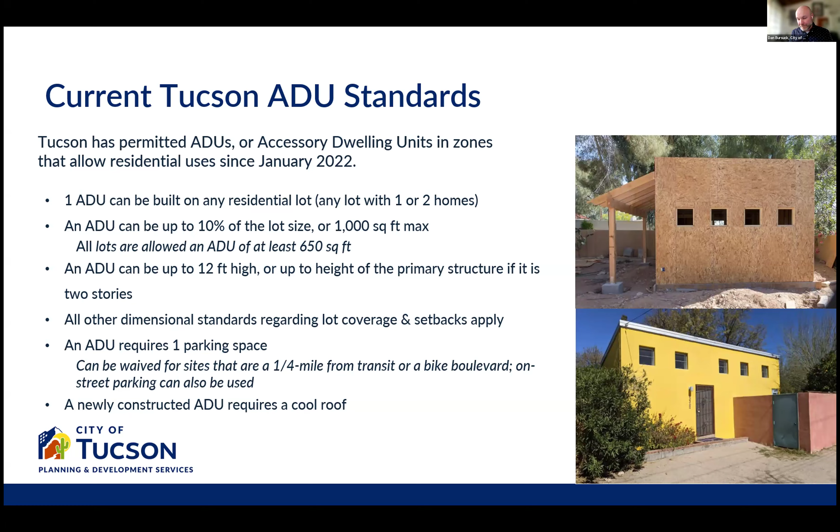So on the left are our standards. On the right are the regulations per House Bill 2720. Again, 1 per lot is what we currently allow. The new bill would allow for 2 per lot. It is specified you could have 1 attached and 1 detached. You can potentially have a 3rd ADU if you have a lot that's over 1 acre, and it has to be for restricted affordable housing, which would be either deed restricted or through municipality or something of that sort for 80% area median income.

Second one is related to size. Our size calculations are different from how they do it at the state level. We do it based on lot size. They do it based on the primary structure. So we will likely be changing that to match what the state sets out. So that is 75% of the size of the primary structure. And then that's up to 1,000 square feet. So we had a 1,000 foot top end, they do too.

Building height: we had that limit that was 12 feet, or if you have a 2-story principal structure, you can go up to the principal structure. This basically says you have to allow for the building height that's allowed within that zone. So generally it's 25 feet throughout the city is what zones normally allow. Parking: we can't require any parking, it basically said, so we have to get rid of our parking requirements.

Building frontage, this is an interesting one. As it is now, accessory dwelling units are not permitted in front yards. However, there is a standard in there that basically says that ADUs have to have the same building frontage as the single family homes. So if there is a situation, and I don't know how many there are of these, where there is a house that is set back significantly more than the houses around it, they could potentially build an ADU in the front with those prevailing single family home setbacks. Not a very common situation, but something they could potentially do.

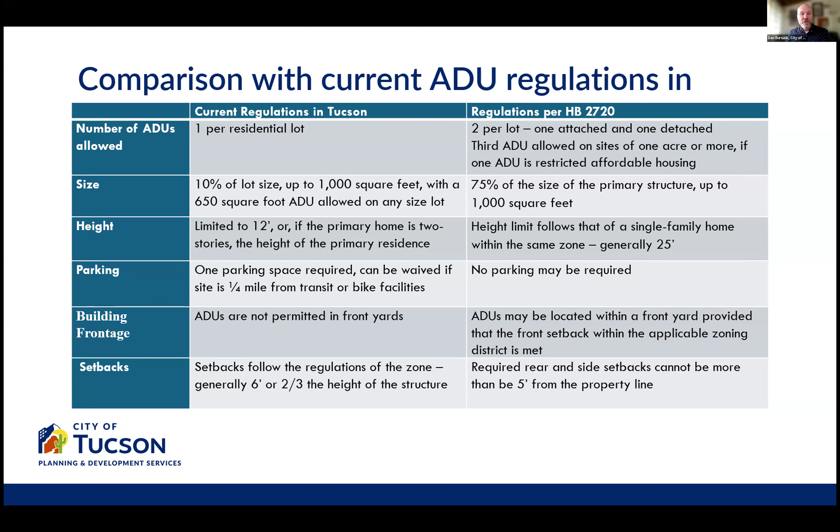You still have to adhere to the existing setbacks, so like 20 feet in most areas, or the historic prevailing setbacks of your historic district or something of that sort. And then other setbacks on lot, currently it's 6 feet or 2/3 the height of the structure. State law says that you can basically only require a minimum of 5 feet from the property line. So 5-foot setbacks would be the new standard coming out of that bill. So those are really the most significant changes coming out of this. There are some other things related to the bill.

CC&Rs, covenants, conditions, and restrictions, are private agreements, and the city doesn't administer or enforce those, and the state bill does not supersede those. So those still apply. So if an HOA decided to add in restrictions on accessory dwelling units to say maybe we only want one, then they could potentially go ahead and do so.

Short-term rentals: there's a weird carve out that is one of the only things that the state allows us to do for short-term rentals in this. However, it's really intended for municipalities that have not passed ADU laws yet. So while it allows us to do this, it's so limited, I don't think it would have any impact. There's like 3 reasons for that. One is that the regulations would only become effective as of the date of adoption. So anybody that currently has the rights to build an ADU right now, or anybody that has built an ADU, it would not apply to.

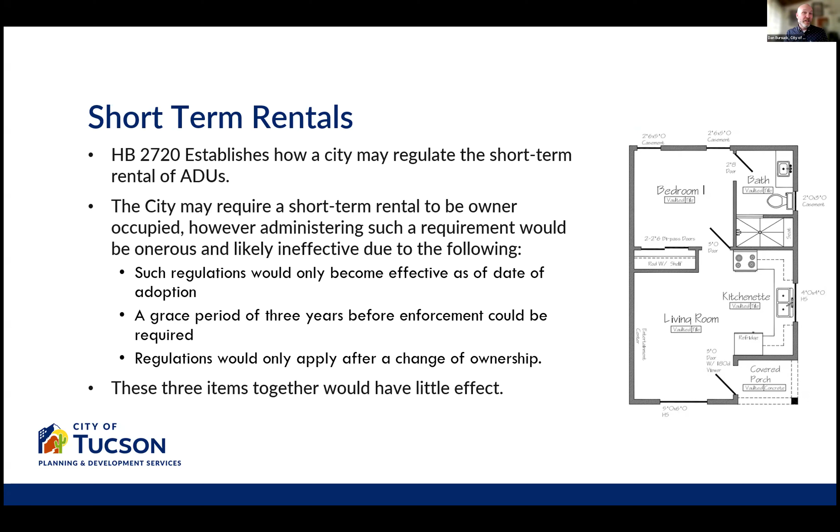Second one is that there's a grace period of 3 years before the enforcement could even be required. This is basically based off the Prop 207 stuff. They drafted that in there, said it has to adhere to this. So you have a 3-year grace period. Then on top of that, the regulations would only apply after a change of ownership. So maybe in 3 years, if someone had sold their property to a new property owner, you could maybe enforce the short-term rental requirement, which is basically only that one person has to live on site. So again, it's so limited and would be very, very difficult to enforce. I think it was really intended for communities that don't currently have ADUs allowed in their code, but that's kind of what they gave us for short-term rentals.

Historic preservation. Historic review would still be required for ADUs within an HPZ or historic landmark. And in addition to this, the NPZs would also still remain for the review. There are some stipulations within the bill that might limit that review. One of which is that the ADU cannot be required to match the exterior design, roof pitch, or finishing materials of the primary single family dwelling. The way we're interpreting that is that you can't force them to make a mini version of the primary structure, which is not really what we do anyways.

But there are some small limitations potentially on that, if you say you have to match exactly the roof pitch and that type of thing of the principal structure. You can do it of the development zone, not necessarily the principal structure. So while the HPC design standards pretty much all apply, there might be some small limitations related to this.

The other one that I see potentially related to this is building height, where it says that basically you can't have different standards for the primary structure versus the accessory structure. And if you're in the development zone and you're using other accessory structures as your building height, you probably would need to actually incorporate single family structures as well, because that's what you would normally have to look at for the standards for single family structures. Again, it gets a little complicated, but at the very least, it still allows for HPZs, it allows for HPC review.